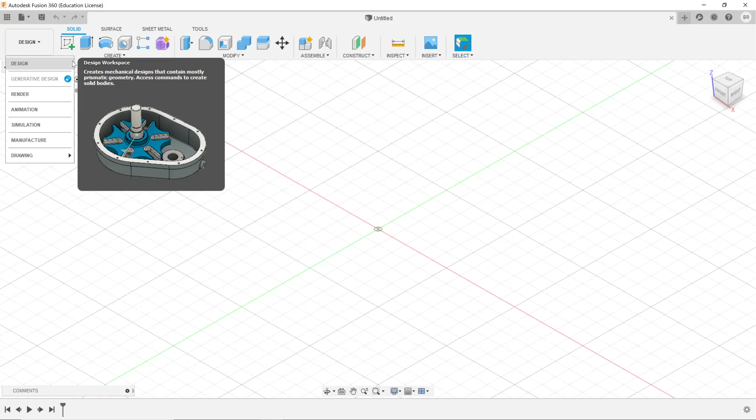Alright, so today's topic is CAD, which stands for Computer-Aided Design, and it's pretty vague because it can be a whole bunch of different things. Fusion can do a lot of different jobs for us as well. So the bit that we'll be working with most is the design workspace. So first of all, I guess we'll open up Fusion so we'll go from the beginning.

If I can close Fusion. Yeah, there we are. Hello, hey, that's a sneak peek of what we'll be doing later. And my desktop is a disaster. And Fusion is there. Wonderful.

Right, so if you open Fusion on your computer, whether you've got that installed on Mac or Windows. Don't worry if you don't have it installed, you can still watch. If you do have it, you can follow along. But it launches just like this eventually, takes a little while.

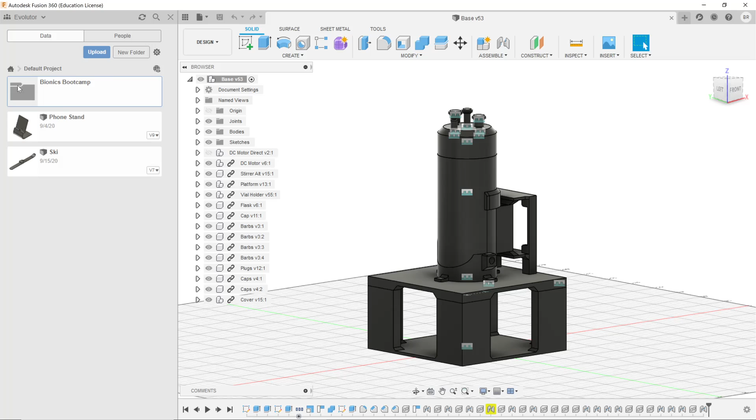This over here acts as your general place for storing your projects, for exploring them in Fusion. They call it the data panel, and you can hide it with that button or show it again. I'll probably keep it hidden for most of this since we don't need to fuss with it too much. Go back to Home, Default Project, Bionics Bootcamp. There we are, and we'll close that. Excellent, we'll have a new blank slate.

I think the plan for today is I'll try to introduce you to the general idea of designing things in 3 dimensions and how you can do that with Fusion 360 in particular. Then there's a set of exercises, challenge problems to work through designing.

But we'll start just by exploring a couple of the tools and the general idea behind parametric CAD, as it's called.

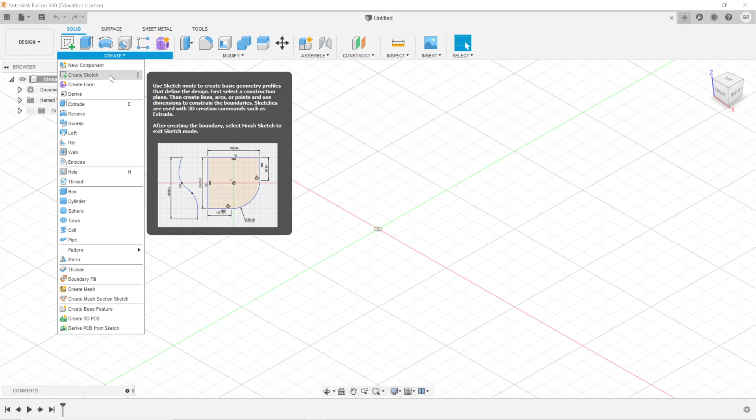Fusion has these menus up here when you're in the design workspace. They give you a bunch of really helpful tooltips, so if you scroll over them, they'll tell you a little bit about each of these tools, and sometimes show a picture of what you can do with them, which is fantastic.

With that being said, I think to be most effective when designing things in Fusion, it's nice to know the keyboard shortcuts for things. So when there's an easy shortcut available, you can see some things that have shortcuts, like extrude is E, hole is H, and things like that.

When there are easy shortcuts, or other tricks like right-clicking with your mouse to get a context menu, I'll try to show those off, at least the ones I know, because they're a faster way to work. I'll try to be sure to show you both the visual and keyboard shortcut solutions to all the things we come across.

So, without further ado, let's make our first shape in Fusion. There's a number of ways to do this.

You could either go into your Create panel and pick some pre-existing solid, which is what this section here is. If we wanted a box, all we have to do is click on a box, and then click on a plane. So this is our origin, we have 3 axes and 3 faces to put it on. We can just click there and build ourselves a box, like that. That's one way we could go about doing things.

But most of our time working with Fusion will be working with things called sketches, and that's where we'll see the parametric nature of the CAD come about. The parametric part means that you can specify different parameters. Actually, if you look at this little picture they've given us here, if it pops back up...

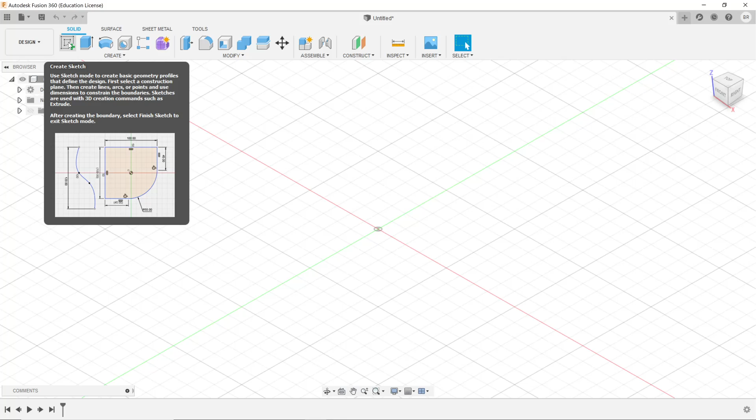Yeah, sure, okay, so I can't point to it at the same time. But you can see in this sketch here below, where you have some lines, that they have different dimensions on it, and there are some symbols scattered about that mean different things. We'll take a look at what those mean—those are constraints. If you know certain things about how you want your shape to look or your part to be, you can specify those, and it will ensure those conditions are always met, giving you lots of flexibility.

I'll show you what that means practically. When you're first starting and want to create a totally new sketch from nothing, you can go up here to the Create Sketch button, or as an alternative, show your origin by clicking this little eye sign here. If you show your origin, you can then click on a face to design.

We'll design on this one because we'll keep our Z axis as up. We can click on that, and if we right click, you can see some options down here. One of them is Create Sketch, so we can do Create Sketch.

Now you can see that's changed our interface quite a bit here. On the side, we now have something called the Sketch Palette, which gives us a number of little options. Our view cube here has stuck us in the top view, so we're looking directly at the plane that we're sketching on.

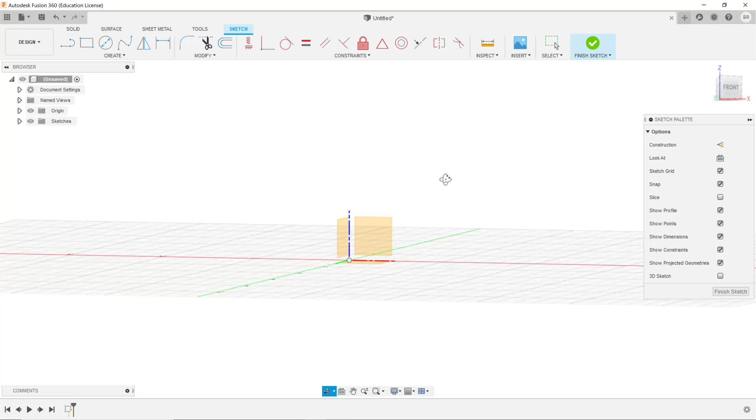Note that, and it might be different depending on your control setup, but if you have a mouse with a scroll wheel, hold down Shift and then click your mouse button to orbit, like looking around in 3D space. The alternative, if you don't have a middle scroll wheel, is to go down here and click on this orbit option, then you can just left click anywhere on the screen to do the exact same thing. That's nice and convenient to have at your disposal.

You see as we do that, our view cube up here in the top right corner moves around. If you ever want to get back to an exact position, like looking exactly down on this, it's a bit difficult to get exactly right, so you can just click on the top view and it snaps you back.

These arrows here let you rotate things around this way, in 90-degree increments, and these little arrows on the side let you turn the view, I think, to the right side, then the bottom, then the left, then the top again. Those just get you to the other side of the cube that's hidden just past this way.

And if you click on a corner, of course, you can see at an angle. That's a bit difficult to see, I'll admit, when there's nothing drawn. We'll come back to that once we have something actually in 3D space.

Additionally, one last moving-around control before we actually draw something: with your middle mouse button, if you've got one, just click and drag without pressing shift, and you get pan, which moves the screen around like this. You can even see it highlights the graphical equivalent, which is this pan option here. You can click on that, and that lets you move things left and right and up and down.

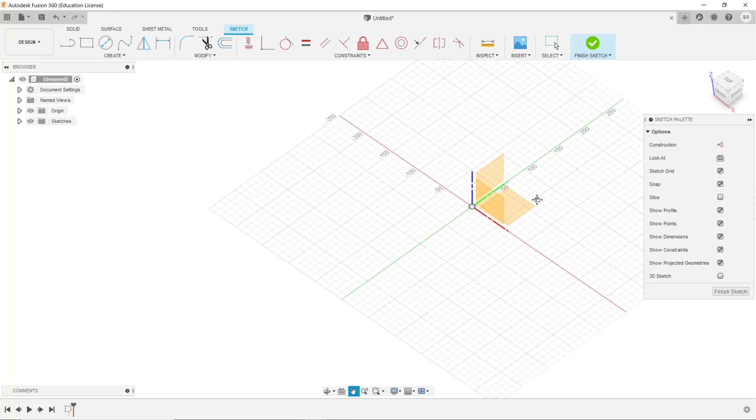Yeah, and those are the main controls. Scrolling like you would on a web page, just in and out, whether with a touchpad or an actual mouse, zooms you in and out of the model. You can see as we zoom in, it gives us more and more grid points, but if we zoom out, there's a point at which it kind of cuts off our little grid.

Cool, so that is how you navigate in general. For the people who have Fusion open, I imagine you've given that a bit of a go. I'll create a quick poll.

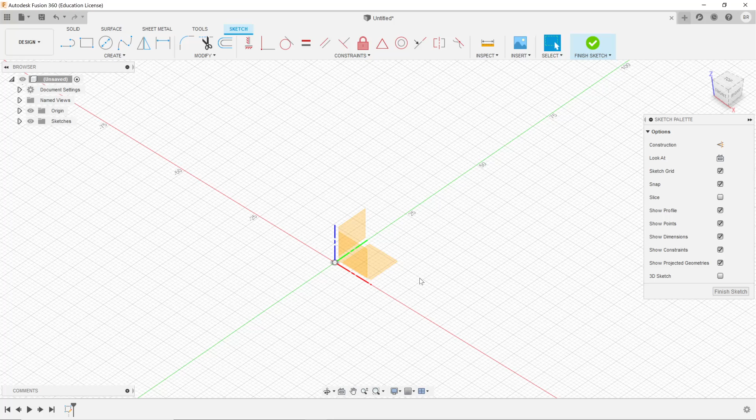Any questions about looking around in Fusion? These are just things that'll become second nature eventually. Oh yeah, I realized I phrased that as a bit of a confusing thing—I said 'any questions about' as opposed to... okay, fair enough. Well, if you do have questions, feel free to write them in either the Discord, where the polls are, or in the meeting chat. Okay, we have one person who might have a question, unless they've reacted positively because they don't have a question, which is my fault for making it confusing. That vote has since disappeared. Okay, yeah, my fault for making that a confusing question. I'll try to keep them positive answers in the future, instead of negative like that.

Okay, awesome. Well, if there are no questions—and if there are, feel free to write them and I'll get to them—we'll go back to our top view by clicking the top of our cube, so no matter where you are, you can just click on top and it gets you back to your top view. That's where we're sketching, and we'll draw something. So, say we want to draw that same box as before. There are a number of ways we can go about this.

There are actually several types of rectangles you can draw. In your Create menu, you now have some different shapes. One of them is a 2-point rectangle. We can click on that, draw out a rectangle, and there's a rectangle that we have sketched. I'll re-hide our origin so it's not in our way anymore.

So there's one rectangle. Another way to create the exact same thing is you can undo with Control Z, like you normally would. I'll turn back off the origin. Another way to do the exact same thing is you can press the R key on your keyboard, and that changes you into this different mode that automatically sets you up to draw one of those 2-point rectangles. I can press Escape to leave this mode, and then from there I just press R and I'm back in rectangle mode. I can draw more rectangles.

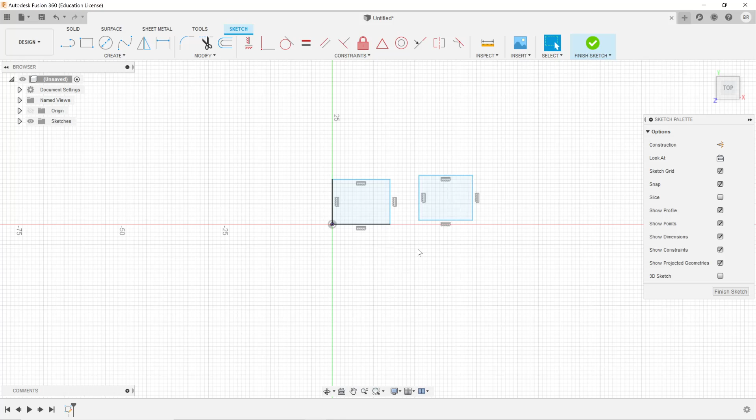I'll undo that. And finally, the most useful thing, I think, for your Fusion work is going to be pressing the S key. If you press the S key, it pops up this little search menu, wherever your mouse is at. You see it has a couple of things that are pre-locked up here, like a 2-point rectangle. There's another type of rectangle called a center rectangle. But you can type on your keyboard anything you would like, and it will search all of these menus for you and return relevant results.

So if I did S and then typed rect, you can see we have rectangular patterns we can do. There's a center rectangle, a 3-point rectangle, or a 2-point rectangle. We can choose any of these. You also see when I scroll over them, there's this little arrow, and that would put it up in this toolbar. If I want to move it out of the toolbar, I just press the X again. So you can put some shortcuts there.

It's incredibly useful, this little S menu. You'll see me using that a bunch throughout this tutorial. So whenever this little menu pops up, I'm pressing just the S key on the keyboard. And that works in both this sketch mode and also in the more non-sketch mode of this Fusion design workbench. So very, very helpful shortcut, the S shortcut.

Stellar. So I'll go on and press the S key, and I'll grab a center rectangle. I'll show you how that's different. Here, instead of clicking on a corner of the rectangle, you're clicking where you want the center of the rectangle to be, and then you can click and drag it out. You see here that this rectangle has its center where I initially clicked, and then I just have to place the other point of it.

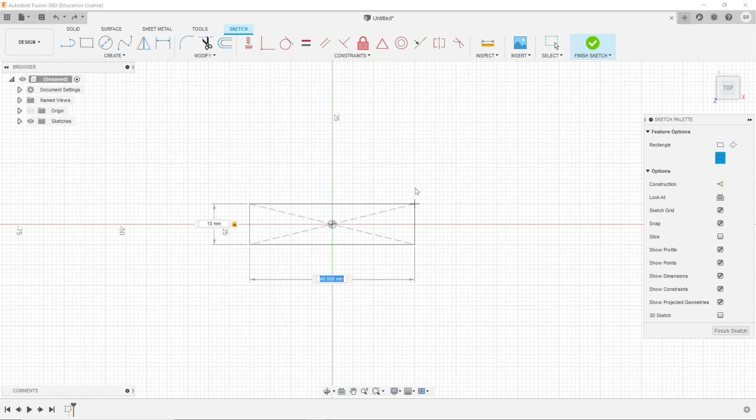So if I wanted to make a 10 millimeter by 10 millimeter cube, so that's just a 1 centimeter cube, I could type 10, and you see that changes it there, and it also changes the size of the rectangle. If I press the Tab key, above caps lock probably, that moves you to the other dimension. Then you can just type the same, so type 10 again, or 20. You can type 10 again. And then from there, just hit Enter, or you can click with your mouse to finish the shape.

So what we see here is a fully constrained sketch. By fully constrained, you can tell that because this shape is black. You'll notice that's different from if we just created a rectangle with no dimensions. This one is blue. What the blue means is, if you just take your cursor, press Escape and you just have your cursor, you can grab sides, you can move them, you can change it. It's not really very defined, it's not constrained to only be one way. It can change.

But it's good in your designs to lock things in so that they cannot be changed without changing these dimensions. That ensures that no matter what future things you do down the line, it'll always be guaranteed that this side is 10 millimeters long, and that this side is 10 millimeters long. And these constraints here are equal constraints. So that means that this side will always be equal to this side.

You can see when I hover over one of them, it lights the other one up. And this side will always be equal to this side. And that's just something that defines this rectangle. That one there means perpendicular. We'll see a bit of that later. It looks like that little T shape. And that one means it's horizontal or vertical. So in this case, it's horizontal.

And if I try and grab this, it's a black shape, so that means it's fully constrained. No matter where I grab and click on this rectangle, I can't move it around because the center is locked to the origin, and the sides are locked to be 10 long, and it's locked to be a rectangle. So you can see that gives me absolutely no room to mess about. So let's go ahead and delete this shape. I can highlight it and press the Delete key on my keyboard to get rid of it.

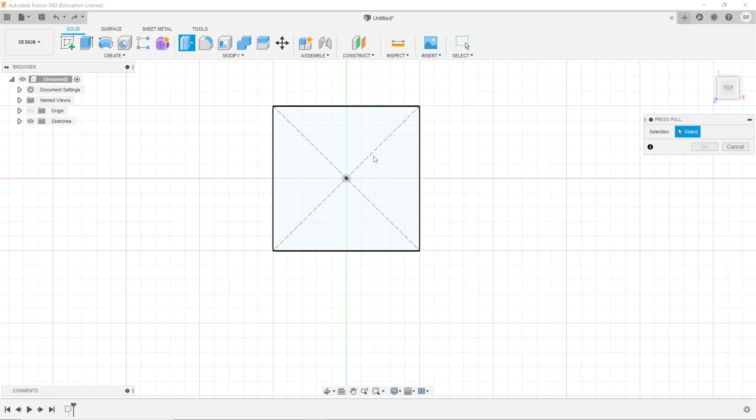So if we go back to our sketch, whoopsie daisy, yeah, back into our sketch, then from here I can just press the Q key on my keyboard, and you see this press pull thing's popped up. I can click on the bit that I want to press pull, which is this bit here, and then if you look at the side, you can see it's giving me the option to pull this up into 3 dimensions. And now we have a square there.

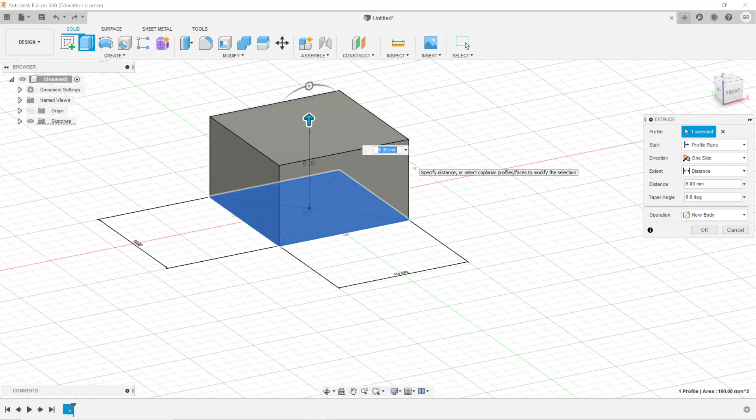You also see that it gives me another highlighted number. This is, again, the dimension we would like to pull it out this way. So since we're making a cube, I can just type in 10 and then press Enter, and then there we are. So now you can see here we have a complete cube. Look how fancy we got there.

If, by the way, any of you are looking at this cube and thinking it looks a little bit strange to you, that might be because, by default, Fusion uses something called orthographic projection. That's basically a bunch of fancy mumbo-jumbo for if you have some shape, like this cube, and you copy it, and I'll paste it. I'm not sure if I'm actually allowed to do that. I've not actually done that before. So, okay. I will take this body here, copy it, paste it, and move that this way.

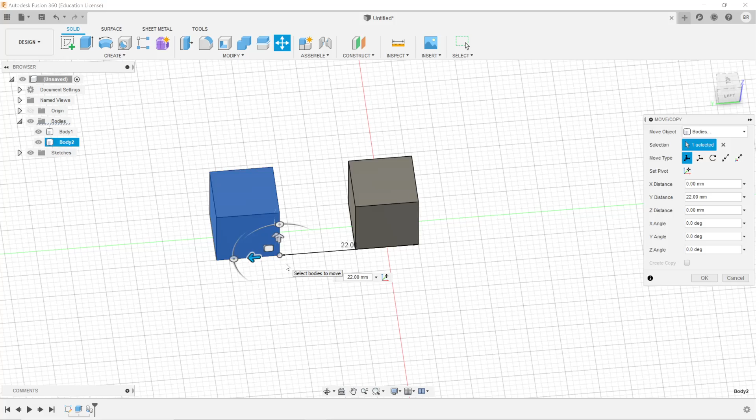So now we have... Oh no, what have I done? Oh, I canceled the move. That's my fault. So I need to click enter instead of escape here. That's fine. Cool. So if we have two squares, what orthographic projection does is it ensures no matter how far away they are, they always look the same size.

So in our actual human vision, when we look at things, the farther in the distance they are, the smaller they are. And that's just a matter of perspective, so there's plenty of reasons for that. So you see here, in orthographic projection, they always look the same size no matter what distance they are. This is nice for making mechanical parts, because you can just overlap things, and you see wherever they overlap that, okay, they must be the same size.

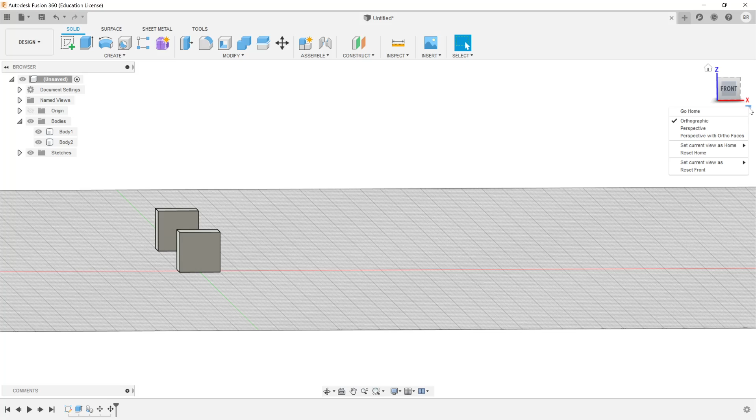So that's helpful. Fusion also, however, lets you look at things in perspective mode, which is how you might more naturally see it in the real world. So you can do that up here by going to perspective mode. Perspective mode. And now you see this looks more like what you would expect in the real world, where the things in the distance are smaller, and the things up close are bigger.

You can also see that the grid lines are more realistic as well. So it's useful occasionally to go into perspective mode just to see what things might look like a bit more in the real world. But the orthographic mode is very helpful for actually designing things.

You also have that option in addition to up here. You can get to it down here, display settings, and visual style? Not quite visual style, camera. Back to perspective, or orthographic. So see here, now they're the same size again, which is very helpful. Although the visual illusion makes the distant one look a bit bigger.

Interesting. But that is that, so I can get rid of that second one. Yep, that's fine, I don't mind. Stellar. And we'll go back to our front view. And zoom in a bit. And up here. So back to our cube.

I'll ask real quick how people are feeling about all of that. So I'll create another poll. Not a pool, we're not going swimming. How are people feeling about sketches and extruding? This time it's a positive poll again, so if you're feeling good, you press the up one.

Excellent. Sounds good. Does anyone have any questions about the orthographic projection stuff? I mean, that is far from particularly important, but it's just kind of good to know if things look weird, that's why. Awesome. Cool. Seven ups there. That's pretty good.

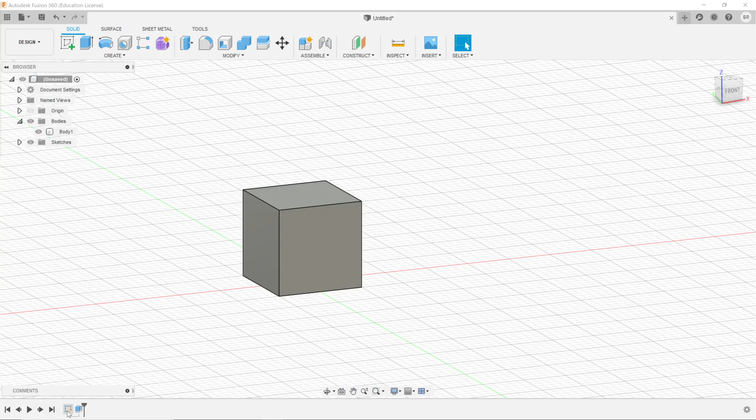But it's time, I think, to take a look at one of Fusion's coolest features, which is this timeline down here. So what this timeline lets you do is go backwards and forwards in history and take a look at all the different edits that you've made. So what you can do with this parametric modeling especially is go back in time and change something and see how that updates your model in the future.

So this extrude is one feature. This extrude is when we took our two-dimensional object and made it three-dimensional. So that just went 10 millimeters up, or a centimeter up. If we go back to before that, you can see we have nothing again. If we reveal it, here is a project tree, I guess, or document tree. So you can expand all these things and see what's inside of them.

So here's our origin. If we turn that on, you can see here are all the different parts of the origin, the different planes, the point in the middle and everything. And you can press all these eyes to toggle their visibility on and off. So I'll hide all of the origin there and collapse it again.

Under sketches, you have our first sketch that we drew. So if we're not seeing it, like we aren't now, we can click on it and now we can see our sketch again, but we can hide that as well. You can turn it on and off with that, which is very good to know.

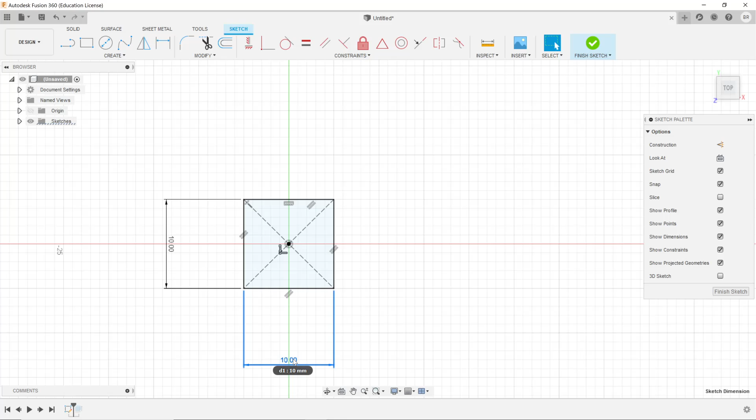But if we wanted to edit one of these features in the past, we can go and double click on it. If we double click on it, you can see here we're back to our sketch view. So we've seen this before. What if, say, we wanted not a cube anymore, but a rectangular prism? Then we could go down to this constraint here that says this should be 10 wide, and say, maybe let's make that 30 wide instead. And we can hit enter. Now it's 30 wide. We can finish our sketch by pressing this Finish Sketch button.

And then if we go forward in our timeline, we see, hey, our extruded part has actually changed. So you notice we did not have to do the extrude step a second time because the extrude was already done. Instead, we just went back in time, we changed this first sketch, and now when the extrude happens, it happens on that new, longer rectangular sketch. So this history timeline is something we might see a couple times as we are working on things.

Very, very useful. It is, I should note, possible to work in Fusion without this timeline. You can, I think, go up here on your main project and right-click, and then there's something at the very bottom that says do not capture design history.

Unless you have a really good reason to not capture design history, I would recommend keeping it turned on. It's very, very useful to have, and it's kind of a pain to not have. But say if you import a model from some other CAD software, by default, this will probably be off. So if you do turn it off, which I'll do real quick, it says it gets removed and further things won't be captured, so it gives you a warning.

So you usually should not do this, but if you do end up with a model that does not have design history, say if you just imported this from somewhere, you can also right-click on this and turn it back on. Now the last option turns into capture design history, and you can click on that and then you get the history back. But now you see it's just this big base feature here.

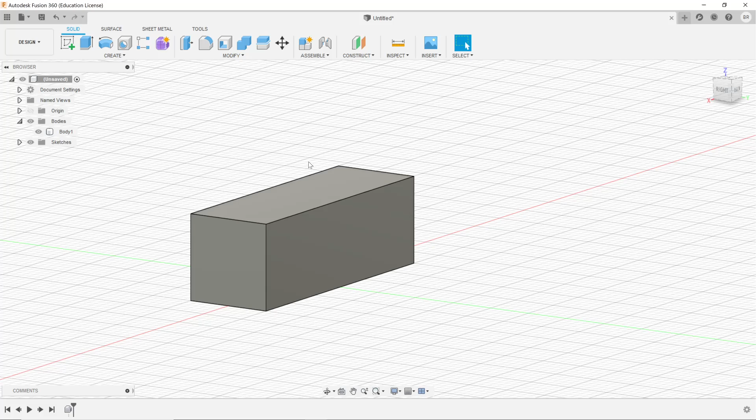Cool. Okay, so we've seen how to form rectangles and extrude them. We're making some cracking progress here. Let's take a look at some of the other tools. So I'll just get rid of that. We'll make another sketch. So remember, to make a sketch, there's a couple of different ways we can do it. We can either do new, create a sketch, or we can turn on the origin and do a right click. I'll just click new sketch.

We pick a plane to put it on. We'll put it on this ground plane again. So we'll put it there. Then we can take a look at some of our other sketching options. So if we look down here, we see a whole bunch of them. So there are rectangle options. There's circles, which one of them is under C.

So if you press the C shortcut, you get a center circle, and you just place where the center is, and you drag it out to whatever you want the diameter to be. So a 100 millimeter diameter circle looks like that. You can create that one there.

Another useful shape might be the arcs. So the arcs here, there's a couple different types of them. If we press the S key, remember that brings up our toolbox, and we type arc. We'll start with a 3-point arc. So this one, I believe you give both end points. So there's one end of the arc, there's another, and then you can kind of drag out the arc this way. And that can be whatever size you want it to be.

You notice that that's blue, which means that's unconstrained, so you can actually move this around and change the size because we haven't specified the size. To specify the size of something that doesn't have a constraint by default, you can use either this tool up here, which is sketch dimension, so you can click on that, or press the D key on your keyboard, and that brings up this dimensioning tool. Then here you can see it lets me set the radius of this arc, so the radius will be 30, say.

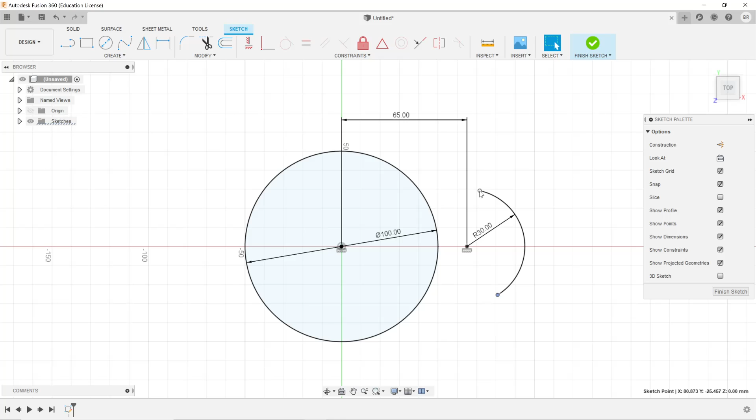So to do that, say maybe we want to make a really ugly lopsided 2-segment snowman, and put that point like on that line kind of thing. What we can do for that is use the coincident constraint. So that means that some point is on top of a line, or that 2 points are on top of each other, or something similar to that. So we can do coincident, and click on that one. It's actually already selected because it's blue.

Then we just click on the thing that we want it to be touching, which will do the circumference of this circle. So we'll click on that, and you can see, zoop, it's gone, it's connected it to that, and importantly, that free circular point here has disappeared because it is no longer unconstrained. So if we take our thing and we try and drag it around, we can't move that anywhere. We can move our mouse as far as we'd like. That arc is not budging.

Finally, we'll do the exact same thing here. So we'll pop back up our coincident constraint again. There, and then click on this line. And finally, we have a pretty fully put together thing here.

One final thing we could do, if we felt like it, you can trim sketches. That's what this modify thingy here is. So you can either trim with these scissors, or you can press the T key to get you in trim mode. This lets you delete certain segments. So say we didn't want this segment separating these 2 parts, we just want it to be one shape, we could get rid of that one there. And now you see it's one fully constrained snowman-esque shape.

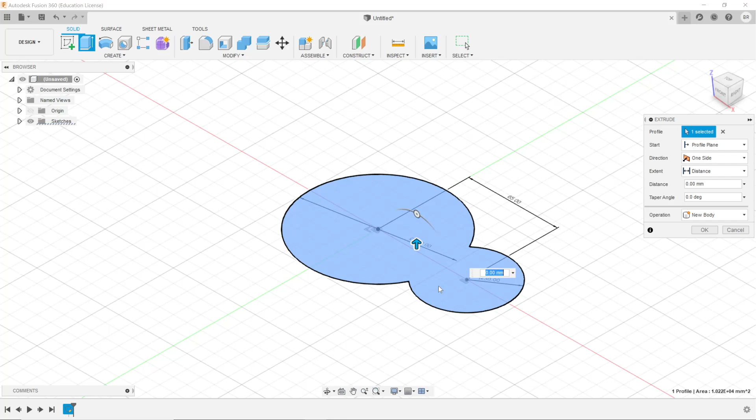Then from here, we can press escape to get out of the trim mode, and then press Q to get into the press-pull mode. That automatically puts us in the side. We have press pull, select this face here, and then we can pull it up or down, or give it some size. And now we can have our snowman in 3 dimensions there. Take a look at him. He's beautiful-ish, kinda. So sort of snowman-esque design.

I think in our second session, or maybe at the end of this one, we'll take a look at a slightly more advanced tool. We'll take a look at it now. Why not? So if I go back here to my sketch, we can be done with our sketch. We can finish it off. You see it's still being showed by default because we haven't extruded it or turned it into anything 3-dimensional yet. There's also a tool called Revolve. So what Revolve does, it shows it a little bit here. There's that blue selection that you can see in that example picture.

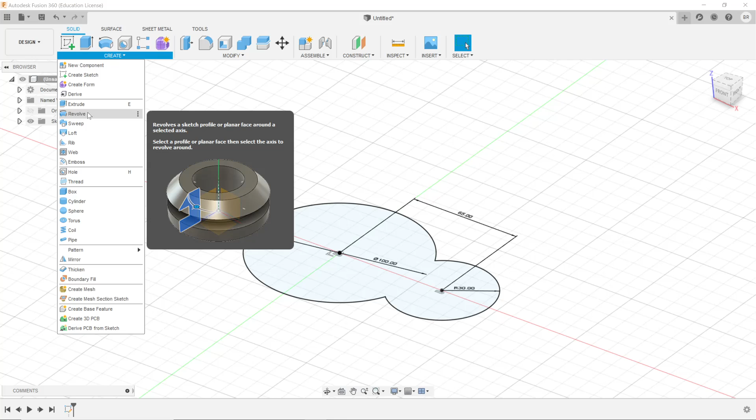So that is your 2-dimensional sketch. And what Revolve does is take a 2-dimensional sketch and rotate it around some axis. So that if we took our snowman thing here and rotated it around an axis right through the middle of it, we could get it to form like an actual round snowman.

So we'll try that. We'll click on, well, the profile was already selected, you see. So now the next thing we need to select is the axis to rotate it around. Our origin has very helpfully appeared. So we can select this red line here, which is part of our origin. That's the x-axis, and that's going currently right through the middle of our snowman. If we click on that, and then 360 degrees is fine, I think.

Try moving the profile. Am I being silly? I might be being silly about how it's actually rotating things. So maybe I need to pick a different axis here. So if I unselect that one, and we select a different one instead, say the green axis, which is hiding way back here. Is that one better? Okay, so maybe it doesn't quite like it when it's in the middle there, so I'll have to take a look at how we can revolve that a bit better.

But we'll jump to that probably in our second session, or maybe at the end of this one again. I guess it doesn't want to rotate around its center axis, so maybe it needs to be an axis outside of the actual thing. But that's alright. There are other ways to form that shape.

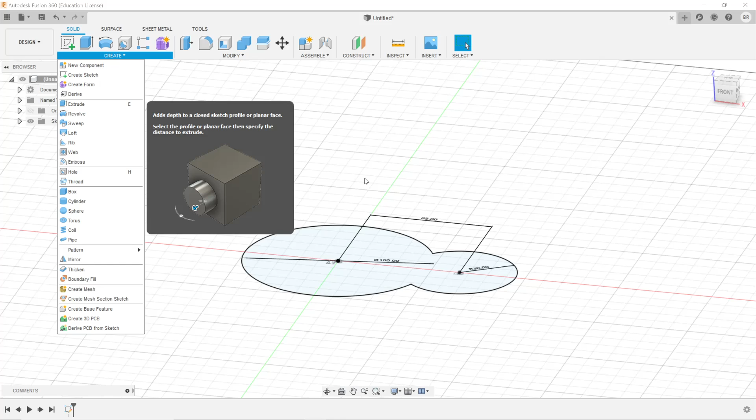Cool. I think the next thing we can probably do, there are certainly plenty more tools, but I think most of them will come across kind of organically as we're doing things. I think we'll probably start on that first little exercise thingy in a second. Before I do, I'll ask how people are doing and if there are any questions. So if there are any questions, feel free to type them. Otherwise, I'll ask, how are people following along and feeling about constraints?

Cool. Any questions that people have so far about either what we've done or why would we do what we've done? I can see Philip is typing, so I'll let him type out his question. How do you create one blob out of the two blobs again?

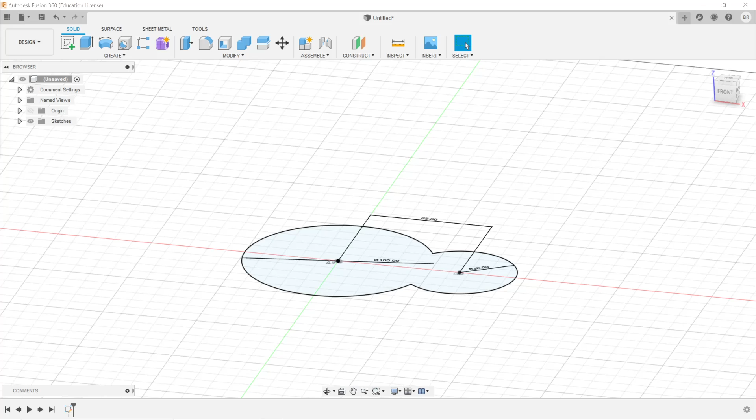Good question. All right, so we can go back to our sketch real quick. I wonder if it'll let me undo straight through that. Yes, it will. Right. So here are our two blobs. The way to get rid of this middle segment is to take this trim tool, which you can grab by clicking these little scissors, highlighting this. It shows a red segment for that bit in the middle. Then you click on it, and it'll go get trimmed away.

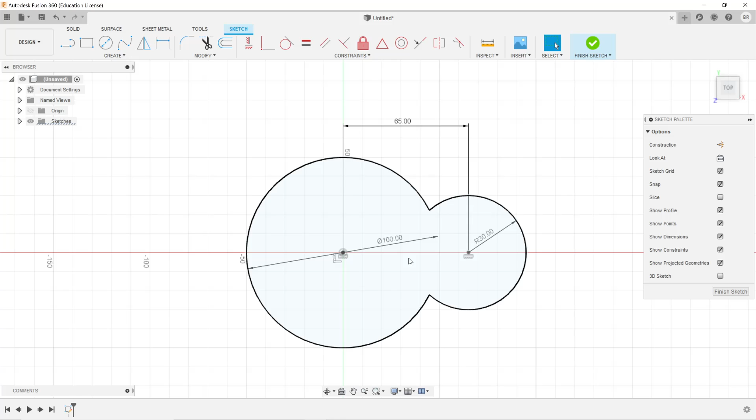The alternative is to press the T key on the keyboard. T key brings up the exact same trim tool you can see, and you just give it a nice little snip. Awesome, cool. And then Maria, you were typing there for a second. Did you have a similar question, or was it related to that one? Have I answered it? Okay, no worries. If you do want to ask a question again at some point, or if it was another one, feel free.

Cool. Alright, with that in mind, we might then look at forming this first shape we have. So I'll press just Control-N, brings you a new document, so you see it creates a new one up here. And you have like tabs, like you would in a web browser, that you can switch between them.

I'll just toss away our snowman. Sorry, snowman, but I don't care about you. Goodbye. Ha ha ha. Alright, and we're back to an empty document.

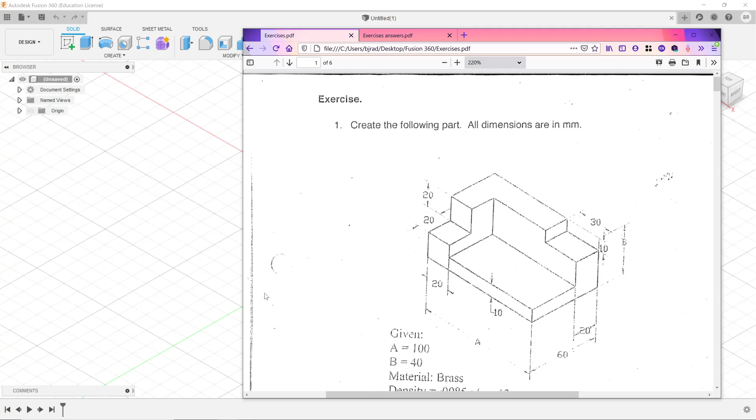Excellent. So, from here, I think what we're going to try and do... again, not Linux. Oh, so much more difficult in Windows. That's the one. We're going to try and make this part here. So, these are a set of exercises. I actually have no idea where these originally come from. These might come from some mechanical engineering module. I think I got these from an engineering student who got them from GrabCAD, who got them from, I assume, from the photocopy nature of them, some sort of university module.

But regardless, it gives us some dimensions. Most of the time, these are everything that we'll need to make the shape. There's a couple of these examples that seem to be missing a dimension here or there.

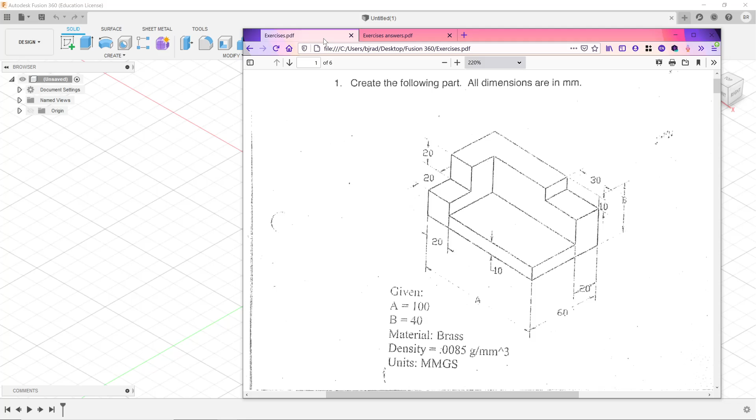First though, let's try and create that. Can we fit these both on the same screen? Time to get brave.

Alright, I think that if we... Whoa, hello Fusion, you do not want to be resized, do you? In fact, you will not be resized. Alright, fair enough. You can see my computer's a bit squirrely about the multiple monitors as well. Okay, I'll zoom out a touch there, and slide over. Is this acceptable to look at? Can people see this part at an alright zoom level, and also still see Fusion decently? Is that all good?

Alright, sounds good. Well then, let's get to making this shape. We'll start with the easy question.

Alright, here's Fusion. I would like to start making something. What is the first thing I should do? Any ideas? And again, instructions don't need to be exact, just keywords work as well.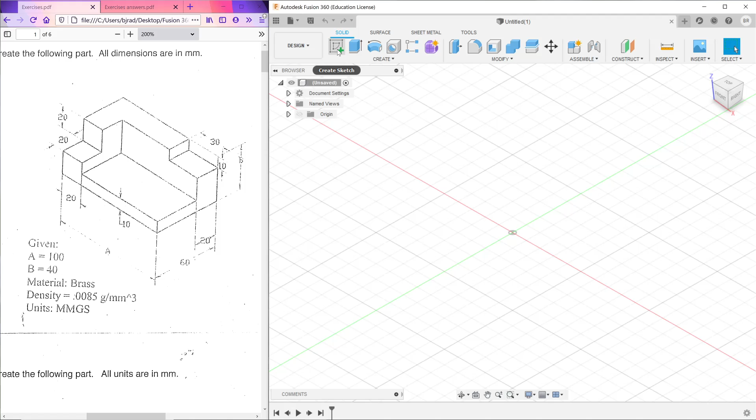I would agree with you, Philip. Yes, I think we should create a sketch. There are, of course, several ways to do that. For now, we'll just press this Create Sketch button, because that's the fastest way to go about it from nothing. Then we pick a face to put it on - I'll put it again on the ground face, there. This is treating Z as if it's the upwards direction, but there are different conventions for that.

Alright, so here we are. I would quite like to create a rectangle, because that's the base of this shape, and I'd like it to be centered around this origin. So the perfect shape for that would be a center rectangle.

I'll press my S key, and S pops up this shortcut searching menu, and I can type center - you see there's a couple different types of center. That's probably not the most helpful, so maybe if I type rectangle, here are different rectangles, I can use my arrow keys, and then click on center rectangle. You can also see I've pinned it up here in my shortcuts, so I could just press S and press this. Those are just different ways to get to that. If you want to get to it the other way, you go here: create, rectangle, center rectangle. All of those are entirely equivalent options.

So I'll go ahead and do this one, that's the fastest one for me. We'll put our center right on the origin, which is this place here - you can see it kind of snaps to the origin. Once you get close to it, it draws a little blue box around it. So I'll put it there, then we can drag out our rectangle.

From our sketch, or our design blueprint here, you can see - somewhat annoyingly perhaps - they've decided to just replace this with a letter, which you then have to look up here. So that's just 100 millimeters in that direction, and in this direction you have 60 millimeters. So we can go here, grab our center rectangle, place it, and we want this dimension here to be 60, then I press Tab, and type in the other dimension, which is 100, and press Enter to finish the shape.

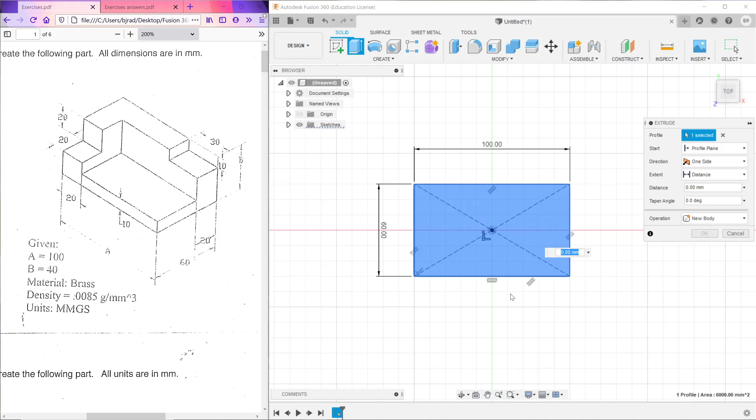Now it looks very two-dimensional still, but that's just because we're trapped in this upwards view. If we just take a look around at the side, we can see this is in fact three-dimensional and is exactly what we're looking for.

Cool. So say we're looking at it in this way. That's the same way, kind of ish perspective that we're going for. We can click on this corner here - maybe that's the perspective that we're looking at it from.

So far, so good. We have a lot still to add, but we can get to that.

Let's see, there's actually a couple of different ways we could do this. So we'll make this part in a couple of different ways so I can show off a bunch of different tools. First one I'll do - once you have a three-dimensional object, you'll notice when I'm floating over these faces, they get highlighted, right? So we could still do create sketch and then click on a face, and then we can write a sketch on this three-dimensional face.

However, there's a nicer way to do that sometimes. You can also just right-click on a face and then create a sketch right here. That's probably the easiest. You also have a repeat option, which repeats whatever you did last. So if you last created a sketch, you can just repeat it there. But I'll just create a sketch on this thing.

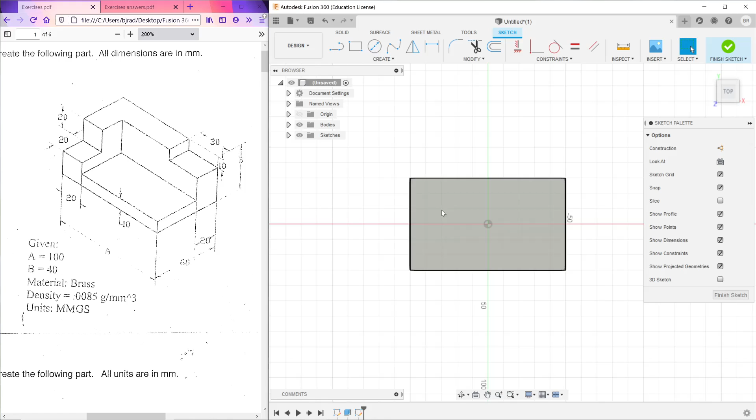And then what I will do is make a big divot here that will correspond to this sunken down region. This first way I'm doing this is kind of by bad luck on my part, not the best way to solve this problem, so I'll show you a better one in a minute. But here we can still solve it because we know how thick that is.

First thing we'll do is we'll create a rectangle here from the bottom. We'll make it just some arbitrary size. You can tell that's blue, it's unconstrained, so that means it can change size. That's actually fine. We know that this wall up here on the left should be 20 millimeters, so it should be 20 millimeters between these two lines.

So we can press our D tool to get our distance back. Actually press escape, unselect that. Press our D tool, click on this line, click on that line, go down, and we can say 20 millimeters please, lock that one in. Now that one's black, you see, so we can still slide this up and down, but this cannot be slid left and right anymore.

We do the same thing with this line, except this one - well actually also 20. So we'll press D, click, and click. There, 20. So there we are. There's our general wall shape.

So now from here, we can press our Q, our press and pull. We'll select this face. We want to shrink that down so that it's 10 millimeters away from the bottom face.

So you could do this by doing a bit of simple maths in your head. We know it's 40 tall in general, and we want 10 left at the bottom, so we could do -30. That pushes it in -30. I'm actually not entirely certain if we can do it this way, but I'll give it a go.

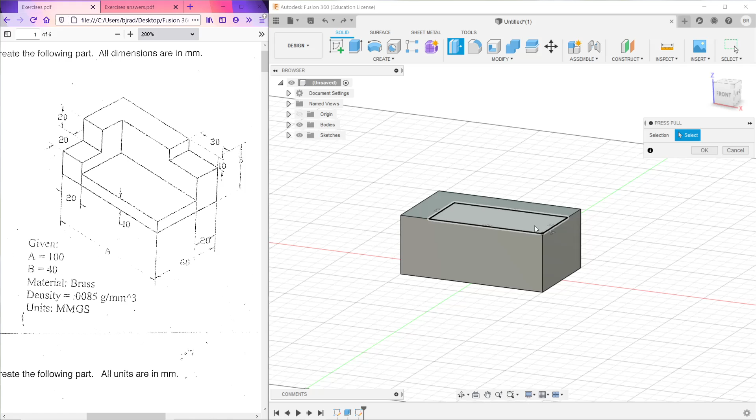I will undo a couple of times. Then we'll go ahead and do a push-pull here, and I'll do the to object again, so you can see it. Here you're in distance mode by default, but you can go to extent under the extrude bit, and then from here you can go to object.

I want to go all the way to the bottom, and then the offset—all the way to the bottom, minus 10. There we are, and then we can go ahead and hit enter. Excellent, alright, so we're here. If we click on that, it's probably a pretty similar looking view.

Now, for anyone feeling keen, what is our next step, do you think? There are a couple of different ways we could go about making these last two cutouts here. What do people think? What should I do, and where should I do it? Any ideas to make this shape?

Yes. How do we change the direction of the dimension? How do you mean, Maria? Do you mean... yeah, like when I wanted to put the dimension as 20 millimeters horizontally, the command was vertical.

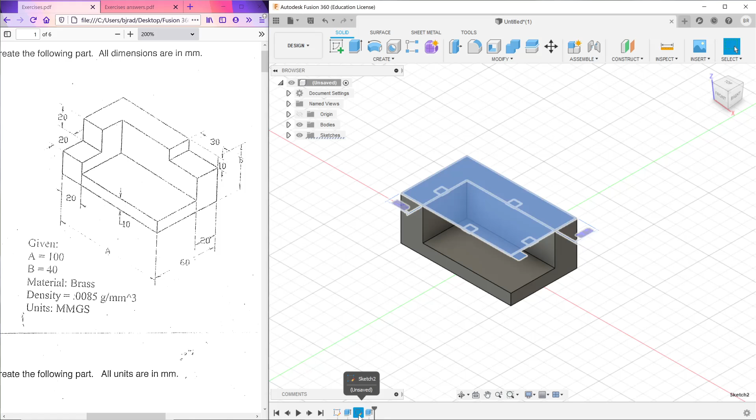Ah yeah, so you mean back here in the sketch bit, right? Yeah, so when you click on a line, it will by default just assume you're trying to give the size of the line. So if you press D and click on that line, you'll see this, which I assume is what you saw. If you then click on a second line, it will switch automatically and give you the distance between them—so I clicked on that second line there.

Okay, thanks. No worries, happy to help. Cool, yes, that's a very good question, something you'll probably run into decently often. Sometimes it'll try and assume for you and be smart, and sometimes it assumes wrong. If it assumes wrong, you just need to give it a bit more information.

Cool, any ideas on what we should do at this point to make these cutouts? Remember, we can create sketches on faces if we want, so I don't know which faces we should do that on. Any ideas? There are several correct answers here.

Any ideas? The crowd goes wild. Okay.

So what we can do from here is the same thing that we did when we made this cut. Yeah, so top face, we'll do that one. It's actually probably a better one because we can do it all in... I'm not sure if it's better, it's equivalent. So if we roll over this top face here, we can right-click on it and go to Create Sketch. I think the right-click is nice and fast because you can just right-click and then go Create Sketch. If you don't want to do that, you can also do Create Sketch up here and then select this top face. Both of those are equivalent.

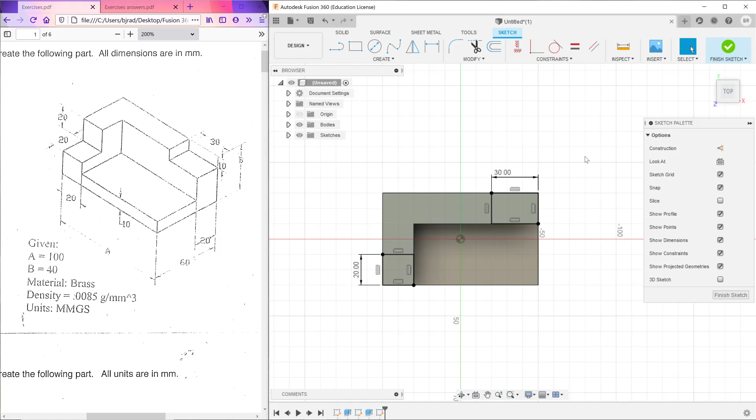From here, we can do our press-pull, so I'll press Q to get to that immediately. Then I can click on this top face here. How far down does that one go? Well, our sketch says that one goes down 10. This time it's best to use the distance, because that's what our sketch gives us. It says go down 10. Then we can also do the same thing over here.

So you'll notice our sketch has disappeared. That's because we've used it once, and Fusion assumes you're done with that, which is a bad assumption on its part, but it's usually correct, I guess. It's not super clever about it. So to get that back, go into Sketches, this folder in your project tree, click to unfold it. If you were doing this well, you would name these sketches. You can click on them twice, kind of slowly, to rename them. So this could be the base sketch or whatever. But it's also ordered, so the last sketch we made is the one we're interested in.

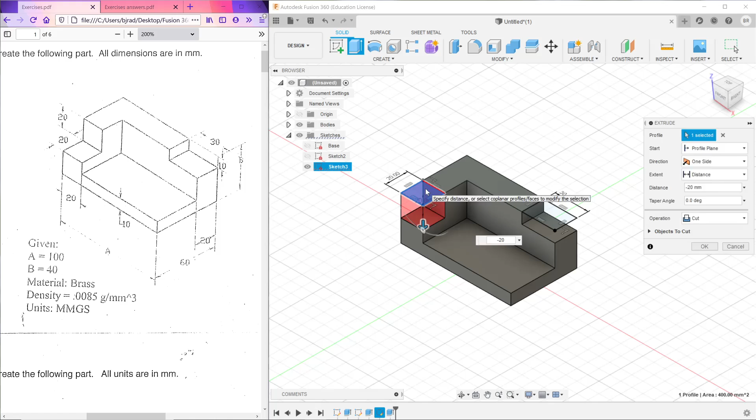So we click on sketch 3, make it visible again. Then we can see our shapes again. From here, we can do our press pull with Q. Grab this one, go -20, type enter, and Fusion will think for a second, and there we are. We can re-hide those sketches, and our shape is all done.

So what if we want to check our answer in this particular case? Well, we can set the physical material of this object. There are, as always, several ways to do it. You can go up into Modify, and then down to Physical Material. Or the much faster way, I think, press S, start typing physical, and there you are, physical material, enter. Then you have a bunch of things that this can be made out of.

You can make it out of ceramic, so we could have a porcelain part or something ridiculous like that. For this particular set of exercises, they're using aluminum 6061. So we'll go down to metal, because aluminum is a metal, or aluminium. Oh, sorry. Oh, that's the yucky American in me. Aluminium. We'll go down to select aluminium, and you can see there's a bunch of different options.

And somewhere on that list, and it's obviously sorted by name and then number, we'll have 6061. And you just click on it and you drag it on top of the shape that you want to apply it to, and then let go of your mouse button. And then you see the color changes slightly, and it's been turned into an aluminium shape.

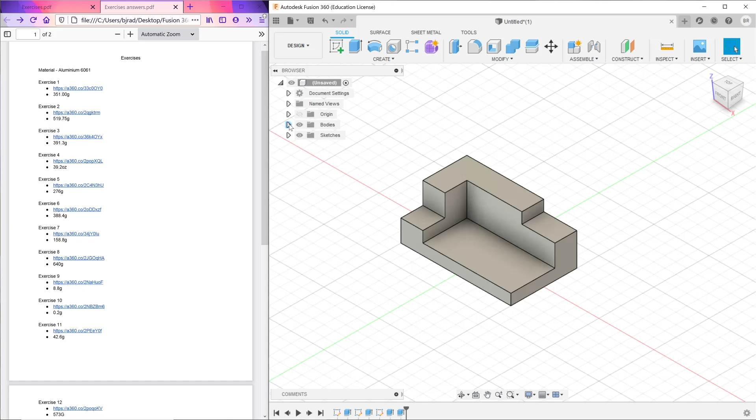Now what we can do to get some information about this is we can right click on it. I think if we do properties from here, yes, that's just the properties of the face. It tells us that it's made out of aluminium. But what we can do to get the whole body is we go under bodies, and then right click on the body itself, and then from there we go to properties.

And this tells us the area, the density, the mass, the volume, the material, which is aluminium 6061, what the appearance looks like, center of mass, other information like that. We're interested in the mass, which, sorry, probably a bit small to see, but it says here that it's 351 grams, which is in fact what we have over here.

351 grams is the expected result for this shape and this material. So that's our way of knowing, okay, sounds like more likely than not we've done this model correctly. So that's our little answer checking.

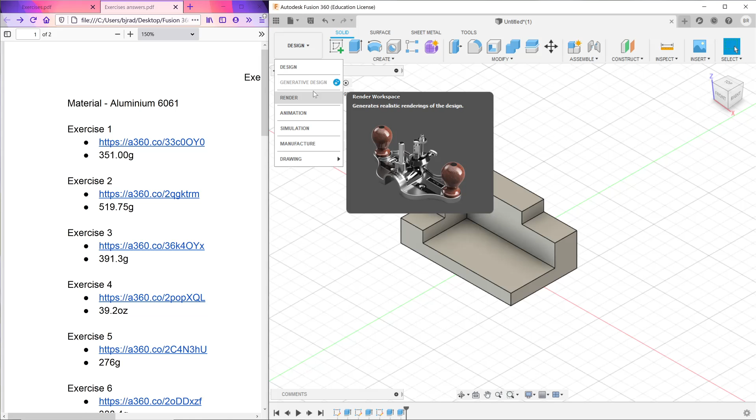There are still some things you can do locally, though. So if you go over to render, you can see this here, and you can do in-canvas render. And you can take a nice, pretty look at your aluminium, and you see it generates a much more photorealistic version. It takes some time to get there. This is doing it on my computer. Then you can export this image or something.

So this is how you can create really nice pictures of your designs to share with others. And they're much more realistic looking than just the ones in design. But this workbench we won't jump much into, because realistically it's just for making things look pretty, and isn't actually something functionally that you'll need very often. So we'll just jump back to design, which is where we are here.

Alright, excellent. That is our first part, so I will go ahead and ask, are there any questions about anything we did in that process? For the people who are trying to follow along, have you gotten to this exact same shape? If so, have you gotten the same mass of 351? So I'll ask how people are feeling about this. First shape.

And that is an excellent question, Maria. And it's very good that I looked that up exactly 5 minutes before this section. So the difference is really quite subtle, and you'll only see it in a couple of places. But for the most part, well, okay. Press pull is a bit more diverse. When you go to a press pull and you click on something, you see, well, okay, in this case it's actually on the offset face.

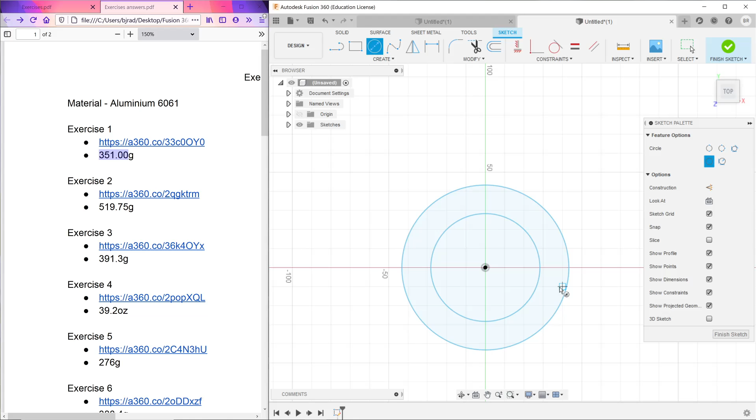I'll click here, so it's currently the press pull, but if I click on this, you see it changes into the extrude tool. So for things like this, it's exactly the same. They're identical. So it's just like doing an extrude there. A superpower, however, that press pull has is it can also work as something for offsetting faces.

So if I press Q again, we have press pull, select this inner face, now it's turned into offset face, and you can see this is something that extrude can't do. I can move after the fact, after the shape, this thing here, I can make it bigger or smaller, the inner face. I can do the same thing on the outside if I wanted to do so. So that is a different operation.

And there's one more different thing that it can do, I forget. You can definitely check the documentation for it. For our purposes, it's the same as extrude for the most part, but it is a bit more flexible and it's smart about what you click on. But yeah, for our purposes, you are correct. It's basically just extrude. Extrude is there. You can get to that with the E shortcut.

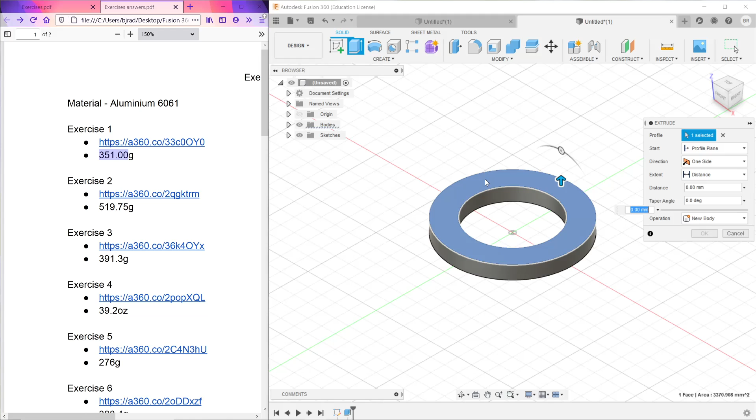That does kind of what you would expect it to do, which is the same as a press pull there. But you can see if I select the E tool, I cannot select this inner face. It has to be a flat one. So that's how those tools are kind of different.

Very, very good question. Are there any other questions? Seems like people are feeling all right about the first shape, which is good from the poll. Awesome. Okay, let's see if any other questions come in. If not, we'll look at this next shape. Cool. All right, this next one.

How to undo a fillet. Hey, good question. So we haven't quite gotten to fillets yet, but if you press F, or if you click this up here, so I'll press F. Oops, I'm not selected on Fusion. If I press F, then you can go here and apply a fillet, which is like a curve on a surface like that. It's really nice for some parts. Makes them look pretty. You can select several lines to do it on. Make something nice like that.

The way to undo it, general undo is, so I'll apply that. General undo is just Control Z in Fusion. However, if that's not working for you, or if that doesn't do quite what you want it to do, you can look down in your timeline here, and a fillet is its own timeline item. You can either move your timeline cursor, which is this thing here, back behind the fillet, so it goes back before time, so the fillet never happened, or if it's got other things in it, you can actually reorder items.

So if we put that there before that extrude, you see now, if we go back in time to before the fillet, we also lose this feature here. If that's the case, then you can just click on that individual feature and then press your delete key on your keyboard, get rid of it, now it's gone. Does that answer your question there? Awesome, cool. Neat. Anything more?

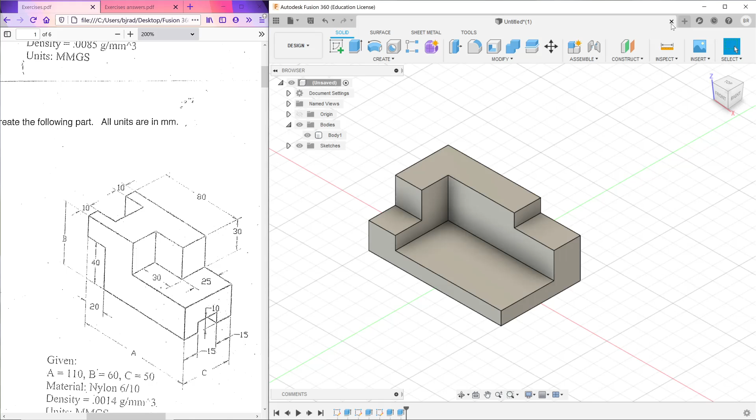I think this next shape is pretty similar to the first one in terms of no new tools, so I think I'll try and ask for more suggestions this time around. Awesome. All right. If there are no further questions, and if there are further questions, feel free to ask them. But otherwise, this is the next shape we're going to try and make. Here are all of our dimensions that we're going to work with.

These little holes, so look, there's a hole, it's kind of been pushed in. We're assuming for all of these parts that all these holes go all the way through the entirety of the object, so that they go all the way out the other side. If that's the case, how should we start this design? There's always a bunch of different ways to start it. We can start with a sketch on any face we'd like. So what do people think?

I'll go ahead and create a sketch, because I'll give you a spoiler, that's probably the best place to start for most things. Which side of this object do we want to sketch first? Up to all of you. Which axis should we go on? Bottom one, this one here, that one there. So I guess, that's the XZ, that's the YZ plane. Any place that seems natural to start for everyone? And remember, there's probably not a wrong answer here. It's just different correct ones.

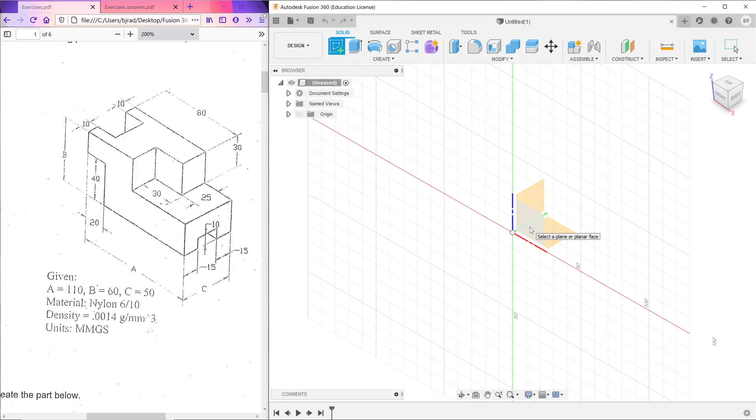Any opinions? What on the x this time? By x, do you mean this one here, the xz plane? I'll assume. Sure thing. Cool. Right on. Let's draw it there. Alright, so now we're looking at it from the side. At least in my head, we're looking at this face here.

So there's a number of different ways to design that. What should we design here? Oh, I forgot to show you one of the most basic tools. If you either go here and click that, or if you press the L key, you get a line. And you can draw line segments, and those connect together. So we could do something like that or whatever. So that's one option we have.

We could also do like a rectangle or something. Anyone have any particular ways you'd like to start? Line segments, rectangles? Anything you're feeling?

This is always much easier when we're in like the same room and people can shout at me.

Cool. Alright, I might make an executive decision then. Alright, I think for my executive decision, I will do this one with line segments. We can see how that one looks. I'll say arbitrarily that this red line here will be the base of the part. And I'll just sketch the general shape. And even here, there's a bunch of different ways that you can sketch this shape.

I'll go ahead and press my L key. I'll go here, I'll go back a bit, and I'll click there, I'll go up, and I'll go over and up again. And then we'll go over a little bit, I'll go down, over, and down again, and click there. And you can see when we close the shape, it turns all solid blue.

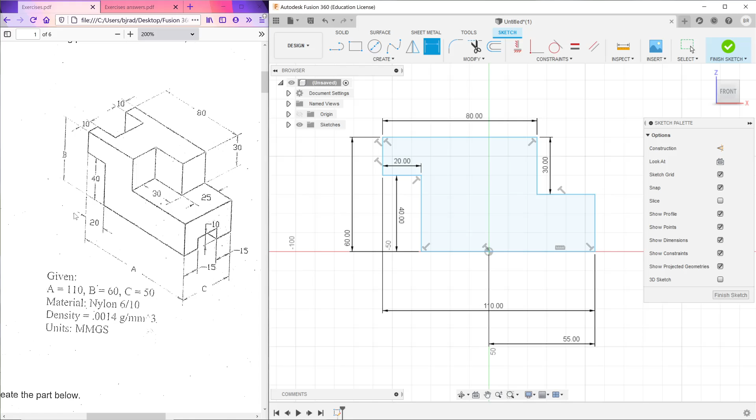Let's see, how far is that inset? We already have that specified, so let's see, what is wiggly here? Aha! The whole position of the thing. Would you look at that? Right, so it's wobbly because I just said that that point there needs to be that distance away from the center point there. There's a better way to do that.

Several ways to fix that. I'll currently just use the coincident one. So that means put this point on this line. So put the center point onto the bottom line. There. Finally, we can see the whole thing is turned black, which means it's fully constrained, and we can extrude it. So, I will go ahead and do so.

So I'll press Q for our press pull. I'll click on this, and how wide do we want it to be? We'll make it C wide, so that's 50. So I'll just do 50, and enter. And there you are, we pushed it over 50. So now we have this shape. Not quite perfect, but it's certainly in the right direction.

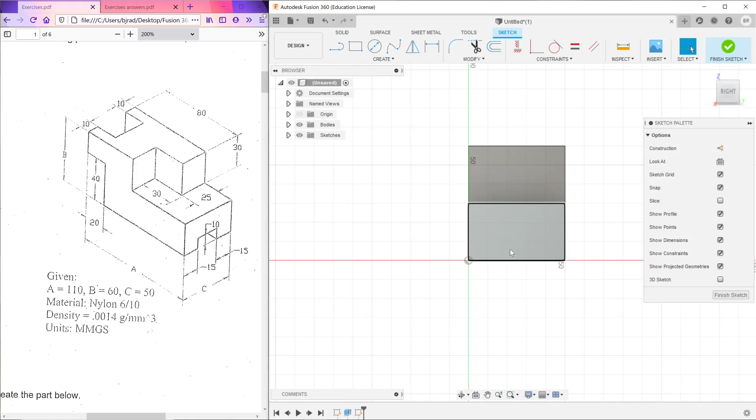First thing I might do is take a look at this cutout down here. So that's on this face, on this side, so I can right-click on that. Go ahead to Create Sketch. Now we're on this face. I'll create a rectangle, so I'll click R to get my rectangle tool, drag up a rectangle, add some dimensions with D, so dimension for the top is 15 wide. Dimensions for this bit it's 10 tall, just like that.

Now you notice this is unconstrained because it can slide forwards and backwards throughout this whole segment here, so we want to put it in the middle. There are a couple ways to do that. What they've told us here is that it's just 15 of space on either side, so we'll follow their instructions and do what they want us to do, which is nice and natural, so we'll click on that, and then on this edge there. Oh, whoops, that was the wrong edge. So, escape a couple times to unselect all that.

Click there, and make that 15. You'll note we don't need to repeat the second one because we've already given the width of this, so it's all turned black, fully constrained, no open points. So it's all fixed there. Cool. Actually, this whole thing seems a bit thicker than it should be, doesn't it? Have I been silly? Yeah, okay.

So I've misread this design here. The design, I originally thought said that this middle section was 15 wide. That's not the case. This 15 is referring to this gap over here. It doesn't actually give us the size of the cutout. So I need to delete this constraint, so I can select it, press the delete key. Now you can see it's variable again.

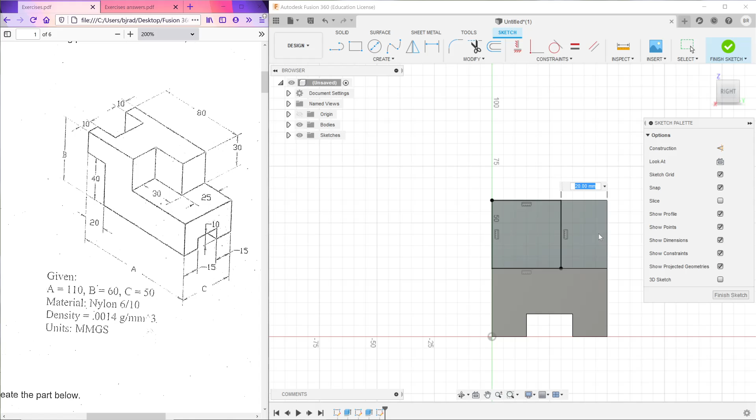So I can click the D for dimension constraint, click on this edge, click on that edge. I would like that to be 25 away. Now it's fully constrained, it's all black. Q for press pull, click on it. We want this to go in 30, so I'll type minus 30, enter, and it goes back in 30. Repeat the same process on the top.

So on the top, we're going to do right click and create sketch. We're going to click R, create a rectangle, just like that. Then we can go ahead with our dimensioning tool and say from there to there, it's supposed to be 10 millimeters, and it's supposed to be the same distance on the other side. So there we are, 10 millimeters. That's what our design has told us.

How far in does that go? Well, here is one of those cases where this design is ambiguous, which is very annoying, but I assumed, and I think it's the correct assumption if I recall correctly, that this is also inset by 20, just like this is. So it's the same amount of being pushed in as that is.

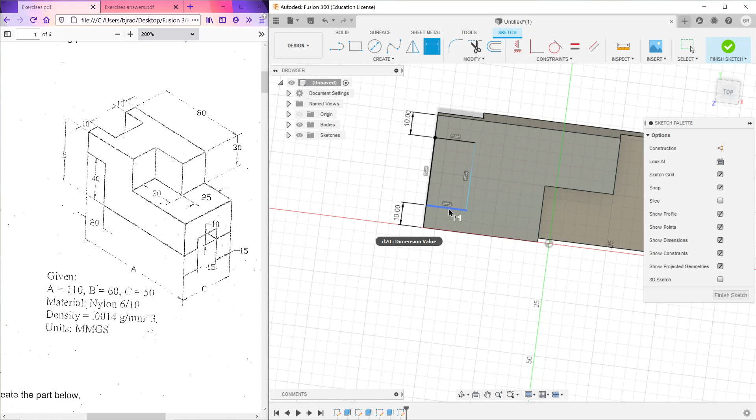So in that case, we can say this size here is 20, or I can show you a cool feature. If you would like to include some line from this three-dimensional object into your sketch, you can project it.

First I'll show you where it is graphically. If you go into Create, Project and Include, then Project is way down there. It has a shortcut, P - I would definitely use that whenever you can. So if you click the P button, you get to this Project menu. Now you select, it just says Geometry, so that can be anything in this three-dimensional setup.

I'll take this line down here, click on it, and now you can see up in our sketch it's been projected in as this purple line. I'll click OK or Enter - both of those will finish. I'll get back to my top view for my sketch.

So if we want that to be in the same distance, then all we need to do is give a constraint. We could do a coincident constraint and say, hey, put this point on this line, and that fixes it. That's all black, all constrained.

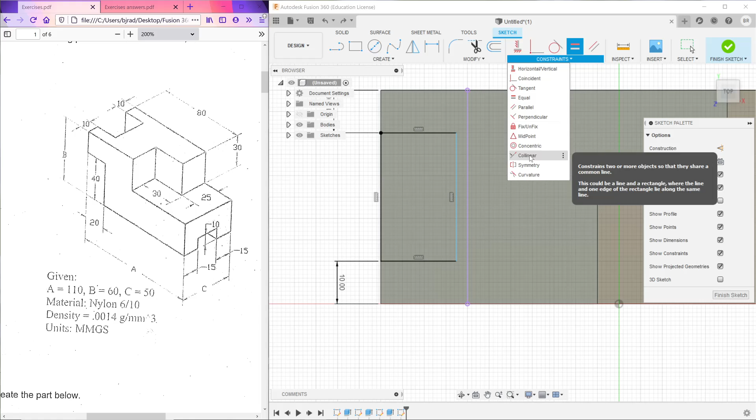An alternative approach would be to look at a new constraint we haven't seen before, which is collinear. This means that they share a same or a common line. So if you want two lines to line up end to end with each other, you can select that line, and that'll bring them together. That's just another way to go about it.

And of course, if you didn't want to do any of that faffing about with projection, you could definitely 100% just do the calculation in your head, or just look at this and say, hey, that's 20, press D, and assign this to 20. All of those are entirely equivalent options, with some slightly different side effects down the line.

I'll do the coincident one - that's nice and short. There we go, stick it that way. All black. That's all we need to do.

Q for press pull, click on that. Let's do extent to object - look at the bottom, go all the way through. Clicked on the object, and we go all the way through.

Okay, there's our cutout. So I believe - I might be being silly and forgetting something, I'm sure I am - but I think that is our complete object there.

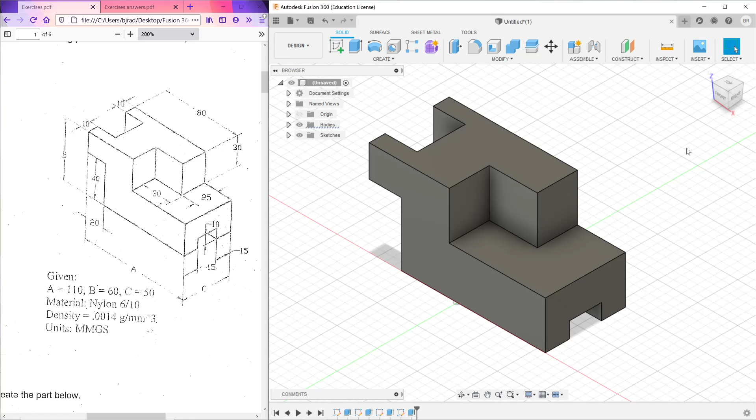Well, we can double check. Press S to bring up our little menu, and get physical material. Assign the aluminium 6061, which is there. Click, and drag it over, close that. Go to the bodies, get the property of the body, and we can see it is 519.75 grams. And over here we see 519.75 grams. So we know that has the same volume, which means probably the correct shape.

Does anyone have questions about that? I'll create a poll to see how people are feeling. In the meantime, please type questions about anything about that shape. Anywhere you got lost, if you were trying to follow along, I can help unlose you, hopefully. So, cool.

And that one's a pretty similar one to the first one. So we saw a couple of new tools there. Repeat the coincident part, please. Yes - so I assume you mean when we were up in this sketch here, where I stuck this line to that projected line. Have you gotten to the point where you've projected this line from down here?

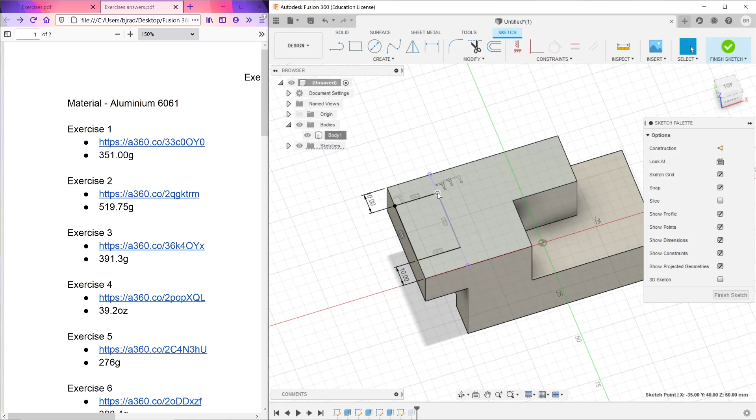So you have the purple line in your sketch. Maybe that's the case - can I select that? Oh, interesting. Oh, there's like 3 different things there. Oh, or is that what this is? Okay, yeah, so I can repeat the coincident part. I'll see if I can undo just past that.

So, there we are. So, for this part, the coincident constraint is this one up here. Also, I've been grabbing my constraints from up there because they're just visible. You can also do the S, though, like I said before, and do coincident.

And if I had the coincident thing, you just pick a point somewhere. So I'll pick either this corner or this corner. And then I can click on a line where I would like it to go - I'd like it to go to this purple line. So if I click on that, it goes ahead and extends it for me and locks it in.

Does that answer your question? Or was your question about some other coincident point?

Neat, finish sketch. Whoops, I undid my press pull. And extent to object. Click bottom, and done.

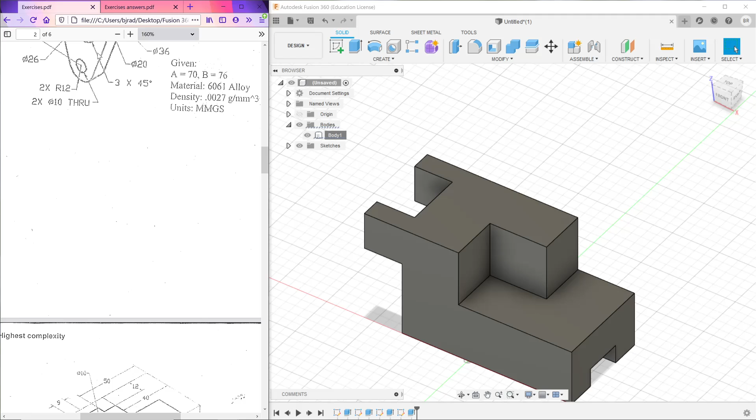Wow, that was not what I intended to do there. I'll zoom out a little bit farther. Take a look at this. This part, looking a bit crazy, right? I think, yeah, we got half an hour left, so I'll go through this one. I'll go through it decently slowly. There's going to be lots of new things along the way.

Feel free to interrupt at any point wherever you have questions, and I will keep an eye on the chats. So, Control N to start a new document. I'll close and get rid of my last one. Destroy it. And we'll start on this.

So looking at this part, it's a bunch of different ways to start it. Knowing where to start things is more intuition than like a right and wrong answer. I'll probably start with on the ground this circle bit. I'll build that on the ground and I'll just build it upwards. I think that'll be fine.

So for me, I'll click Create Sketch, click on the ground plane, and then I'll click C to draw a circle. I'll click on this center point and I'll drag it out. Now, you might be wondering, how do we know how big this circle is? Well, I can first type the answer, which is 76, and hit enter.

And the reason I know that is because you have this little symbol here. This symbol that looks like a circle with a line slashed through it, that gives you the diameter of a certain value. So you can see here, there's a diameter of 76, which actually Fusion uses the same diameter symbol, and it's pointing to this outside ring there, so we know that's how big this ring is. So that is that.

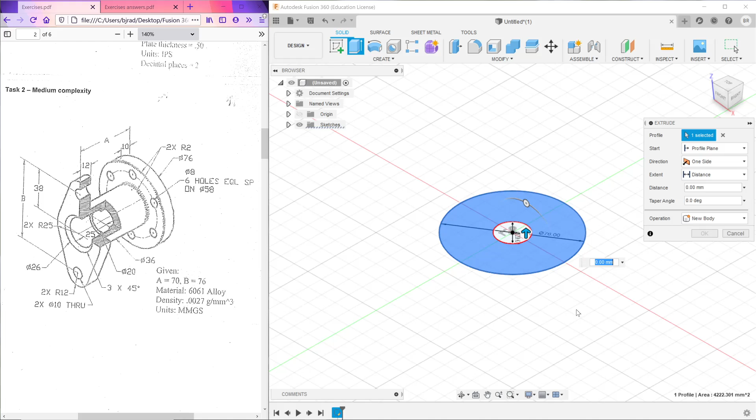Now, I think what I'll do here is I'll call that as a simple first sketch, and I'll extrude this up a little bit. So I'll click Q, click there, type 10. This 10 has come from this measurement here, so we know that that's 10 millimeters thick. So there's our base bottom shape so far.

Now, we're going to encounter something new. We want to place 6 holes evenly spaced around a circle in here. You can see from this design, it says there are 6 holes equally spaced, which is what the EQL-SP means. So equally spaced on a diameter of 58 millimeters. So what we can do there is click on this face.

Ah, yes, we get to see a new thing. That's exciting. Create a sketch. We want to draw a circle again, and we know that that circle is going to be 58 millimeters across.

But we don't actually want a circle here that we're cutting out or extruding or anything. We just want to put other things on top of that circle. So if you want to create parts of a sketch that aren't actually part of the final design, but you can use as a reference, you can turn it into a construction line. Click on the line, and click this construction toggle here. You see that's turned into a dashed line.

So that means it's a construction line. You can see now this is just one face, we're not splitting this face in half anymore. When it wasn't a construction line, there was a separate face out there and the inside - those were separate parts. But once it's construction, those are no longer different. You can also do that by selecting this and pressing the X key, and then you have your dotted line all the same.

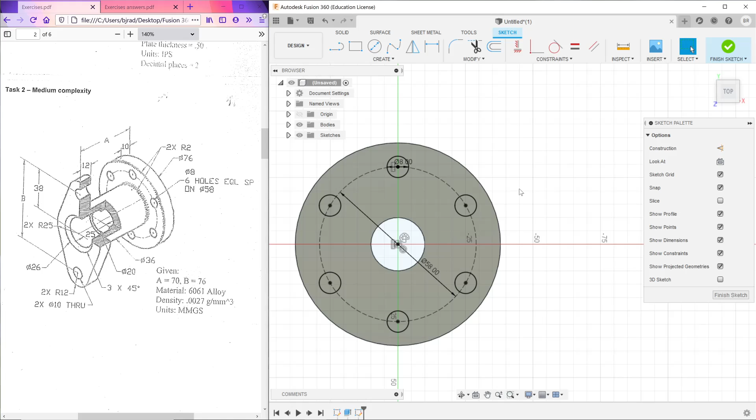There you are, you've got a bunch of holes around. Now, there's a bunch of different ways I could have done this in different orders. At this point, I could do a press pull and grab all of these individually, then push those all back into the bottom to cut them out. But that might not be the most convenient way. So another way that you could do an equivalent thing - I'll cancel and undo. Don't want to go too far, do I? So here we are, back before we've done things.

Instead we could just take this singular sketch here, and with Q, take this circle and do a to-object cut it out all the way to the bottom. Oops, there we are. Okay, so there we are, we have one cutout hole.

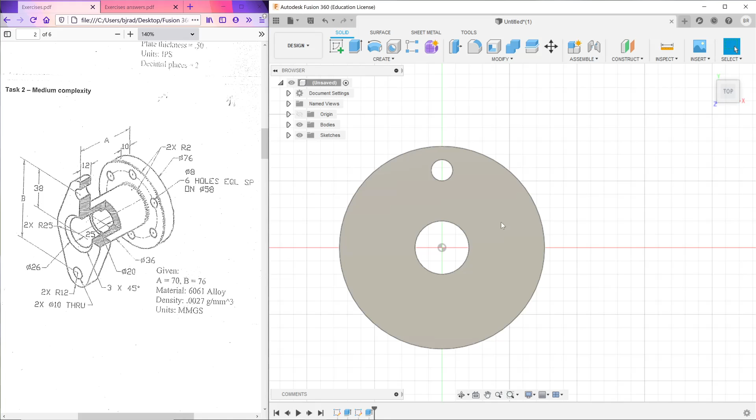Another thing you can do from this workspace is still do your circular pattern. If we go back to the top, or even just a 3-dimensional view, if I search up my circular pattern and go here, I can now select a type of item. So I want to rotate a feature - a feature is something on the timeline. This hole was created by this extrude feature. So if I select feature, I can select this feature here, which is this extrude. You can see it highlights it in blue in Fusion.

Then I can take the axis - this is a bit different from our sketch one, because now it's in a 3-dimensional thing, and I want to rotate around this blue center axis. Then I can say something like 6, and enter. This time it actually rotates the full cutout, not just the circular sketch things. So that's another way to do the exact same thing. Lots and lots of options in Fusion.

Awesome. So that's what we have there so far. This squiggly line here that's pointing to that, and then also to this, means it wants a fillet there, so a rounded edge. We can apply that now, might as well, at least for this outside one. We can apply that by pressing the F key. That brings up our fillet, or of course you have this option up here, that's your fillet, a rounded corner.

So I'll press the F key, I'll press this, and it tells us it is a radius of 2, so I'll go ahead and type in 2 for the radius, hit enter. There you are, nice rounded corner, all the way around the outside. Coolsies. Any questions about what we've done so far? We'll hopefully just be continuing on, there's plenty still left to design, but I don't want to wait too long to ask if people have questions.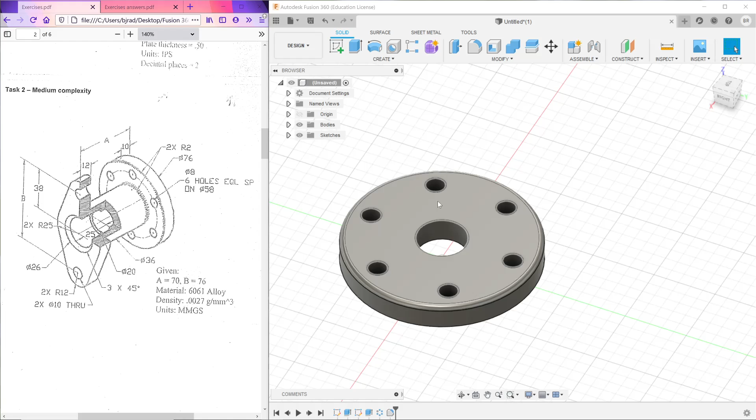Next thing we need to do is this big column here. We're given the diameter of the outside of this column is 36, so we need to make it a 36 around the outside, and we know that there's this hole here through the middle that's 20. We already have that designed in. So here I'll click on this face, right click on it. Oops, I wasn't clicked on Fusion. Right click on it, and then create a sketch. And from here, grab a circle, click on the center point, drag it out, make it 36, hit enter. There we are. Slap the extrude button, which is Q, or the push-pull.

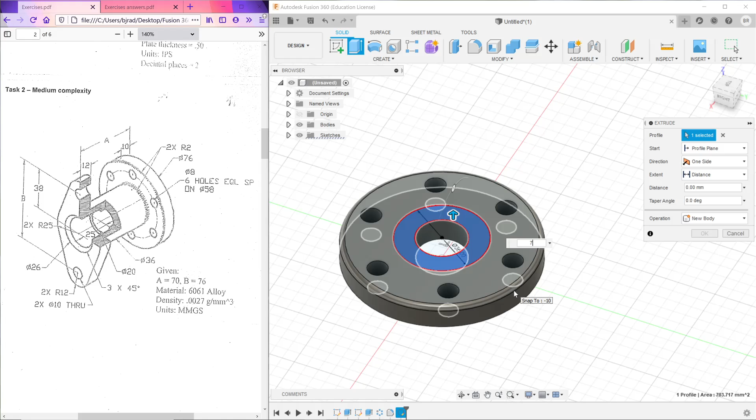Select this donut shape here, and we want to pull that up a certain amount. There's different ways that we can calculate that distance. What it has given to us is this distance A, which is all the way from the bottom to the top. I'll show you something neat, why not? So first of all, we can set it to 70, which is the value of A. That is a bit too long, because that's going to be including this bottom and top bits.

But something we can see here is you can do maths in these little fields. So if I type 70 minus 12, which is going to be the width of this top segment, minus 10, which is the size of this bottom segment, that will give us the correct thing. It'll calculate it. It's 48. So we don't actually even have to do that ourselves if we don't want to. And then go ahead and hit enter, and there you are. You have it going up the correct amount.

From here, now we want to create this really weird face shape, and here's where we're going to see a bunch of wacky new stuff. So I want to create it up here, so I'll right click on this, I'll say create a sketch, and now things will get exciting. Yeah, it doesn't really matter which way I create it, so I'll create it this way. We're given a couple of little points.

Reading these designs is honestly sometimes quite difficult. I'll admit the first time I made this part, it took me ages to figure out what they were telling me, and there are still parts of this that I think are disgustingly unclear. Like this diameter of 26 is not actually, believe it or not, the diameter of that outside circle.

But it's actually the diameter of this inside part, which of course they do a great job of labeling by putting the arrow in the wrong place. But that is not an issue. What we can do is take a look at these numbers here.

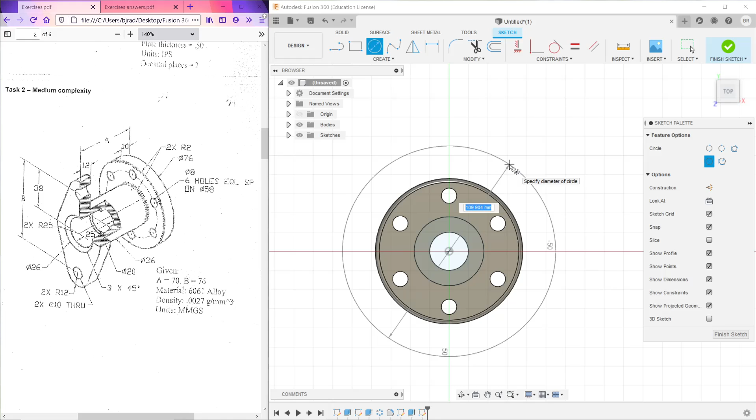There's a bunch of different ways to do this. I've already done this in like 3 different ways when I've been doing this problem. One way that's pretty intuitive, make some circles. So we'll create a first circle here that is a diameter of 50, because it's a radius of 25. So if I create that, you can see there's my diameter of 50. Yep, that's right. Then we can do the same and create some other circles.

And in fact, if you find this confusing to look at, which at this point, honestly, I find somewhat confusing, there's lots of circles there, you can hide the bodies just by turning off the visibility there. Now we get just our sketch. And of course, it's still there. We can just toggle its visibility on and off. So there's a circle. Stick with that. That seems cool enough. And then what we can do is add a couple of other points.

So we know that from this center point out to the middle of that second hole, it is 38 millimeters. So we'll create a couple of holes out here. I should have given the sizes of those. That's fine. We can do that retroactively with D. Click on them. Diameter of these holes is 10, it looks like, for each. And that diameter is given here. It says 2 times 10 diameters all the way through. So that's there for one. There's the other one. Both the diameter of 10.

Oh, actually, hey, we can do something cool here. I can show you a symmetry thing. So if you're doing something that's symmetrical, like we'll be doing here, real quickly we'll say, how far away are you from the center? You are 38 away. And we'll give you a horizontal vertical constraint so that you're no longer allowed to wiggle, so you're on the same horizontal axis. Now you see they're both black.

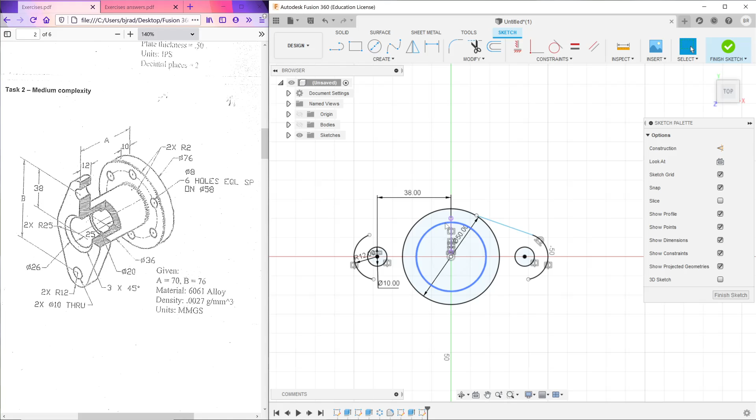In fact, we'd actually like to have that exact same tangent constraint here. And by the way, what I just did, first time I've done it in my life, because I discovered it earlier today while teaching you. Right-click, you can repeat options up here at the top. And you don't have to click on it, you just have to be in the right part of the pie. So you can just right-click and then go up real fast, and you can repeat whatever the last thing you did was. So I want this line to be tangent to this circle here. So you can see that that's done.

Now it looks almost constrained. The line itself is blue, but this point, recall, is still not there. So when it goes across the circle, it's perfectly tangent to it, but it's not actually on the circle. So then finally, coincident constraint, our old friend. I'll do it with S. So coincident constraint, and press that there. Oops, it was already selected. Press that there, it's selected, and then press the circle, and it's connected up. Excellent, just like that.

We could do mirrors, or we could just repeat the same process. I'll probably just repeat the process on this side, and then mirror it onto the other side, although we could mirror it in all directions, it just depends on what you're feeling. Here I'll repeat the process so you can see it. So I'll take my line, I'll click there, I'll scroll along here. How do you smooth the line in the arc component again? Yes, that is a tangent constraint. So I'll go along and make it not smooth. So there's a pretty unsmooth line.

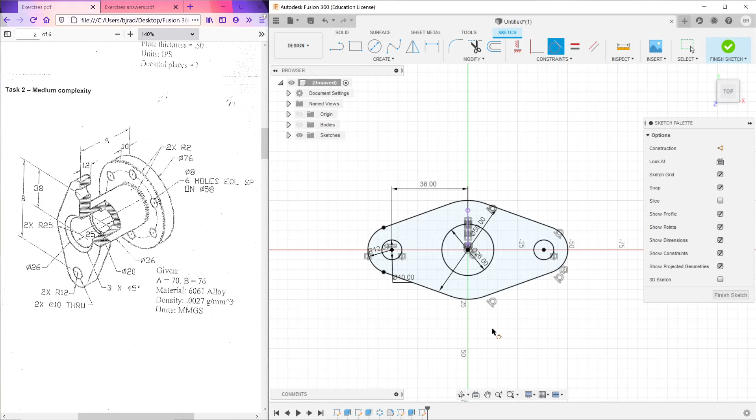I'll pause here real quickly. Any questions about this sketch we did there? That was a pretty funky one. The way that I've done it just now is a way I've never done it before. I've done it 3 different ways, and I've done it 3 times. Any questions about that one in particular? I'll ask in a poll in a second once we've done a little bit more, but I'll just give a pause if anyone has anything to say. Cool, okay. Well, if you're typing, feel free to continue doing so.

In the meantime, I will take this and we'll extrude it. So I'll press Q for push-pull, and I'll press on this top face. We'll look at the side, so we want to bring this up a little bit. We want to bring it up 12, because that's how thick this top is. So we'll type 12, and enter. There we are. There's our top bit. So we're getting very, very close now.

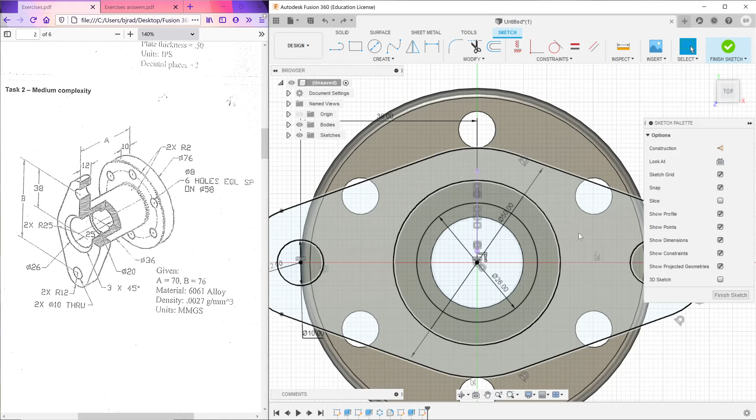Ooh, interesting. Very interesting indeed. Yeah, okay. That's a bit non-ideal the way I've designed this, but that's fine. You can see here that there's this bit of a lip inside, where you're moving from the 26 down to the 20. Ooh, actually no. Okay, hold on. So when we extruded that? No, that's separate. So somehow this line got included here and we didn't want it to be. So that's why that looked more off than I was expecting.

So this line here is our 26 that we drew. This line here is that outside bit. If we want, we can click on that and turn it into a construction line with X. So now it won't be a face anymore. We can also, of course, just select several faces. So if I go back, now nothing has changed here. Well, okay, I say nothing has changed, but I've obviously changed it.

Yeah, it's still a construction line, so turn off the construction line. So here's what we had a second ago. I clicked on this, I push-pulled this whole thing, so you can see it's including that segment. If we want to include this donut bit as well, just click that as well, and you can extrude them together.

I'll probably just do that, actually, to be honest. Then we have that. Wonderful. Okay, that looks a bit more like the correct amount of indentation there. However, we know that that's probably not the right amount of indentation. So yeah, the first way I designed this I think was a bit better than what I'm up to at the moment, but that's right. We can still figure it out.

So it says that's 25 away from the top. We know that this thing here is 12 thick. We can figure that out if we bring up our inspect tool with I. So press I, click on this line, it says it's 12 millimeters thick. So that needs to be 25 down. So what we can do is grab our push pull, click on that face, and we want to move that down a little bit. So I want to move that down the difference between 25 and 12, so down 13.

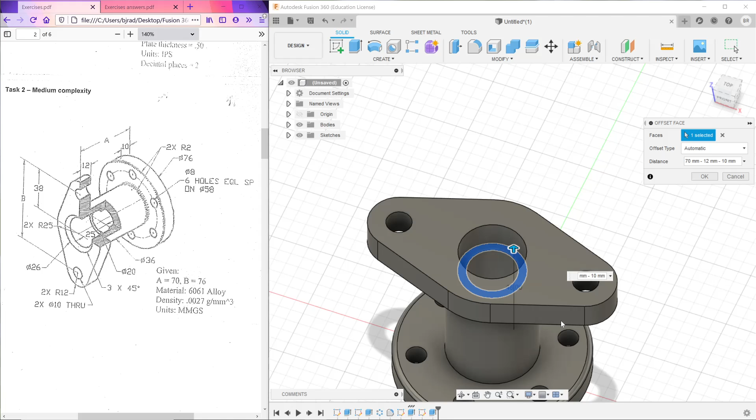So minus 13. Oh, but not the whole thing there. That's a bit upsetting, isn't it? Okay, is it going to let me... of course, because that's just one face, right? If we extrude, maybe, is what we want to do. So extrude with E, grab that, then push that down by 13. Yeah, there we are. So that cuts in.

So there I use the... That's another difference, I guess, Maria, between the extrude and the faces thing. The face, it moves the whole original face. The extrude just grabs this bit that's visible. There are these subtle differences that I guess you just have to come across as you get to them. Awesome. Cool, so that's pushed in the correct amount. We're basically almost entirely done.

Couple of missing features. One is this thing here, which is a chamfer. So it's like a fillet, except it's a straight cut instead of a rounded edge. So what we can do is bring up the chamfer tool, which is either here under chamfer.

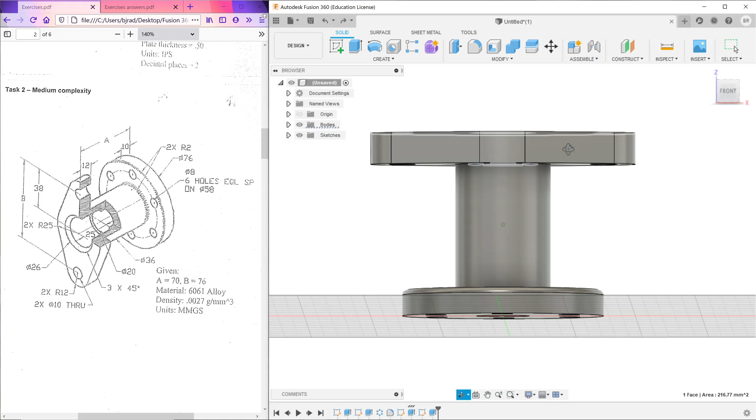Last step again, yes. So the bit where I push this in. Yeah, so for you, Isaac, this step here is kind of, if I'm being honest with you, a consequence of me designing this part in the wrong order, essentially. Not the best of ways to do it. It'd be better if I just created a sketch on this face and pushed it down 25. But what you can do is select this little donut here that already exists. However, it's at that level, which means it's 12 down from the top. We want it to be 25 down.

So we can press E for extrude, or we can click on this option up here on the top left, extrude, and then push that down an extra 13, and then hit enter. Does that clear things up? Hopefully. Cool. If you are still stuck there, just let me know.

Awesome. But after we push down that segment, it cuts the whole thing for you. Oh, well, that's very interesting. Oh, do you mean like it's made the whole top shorter? So it's done something like, if I were to press Q and do the same thing. Oops, sorry. So not that. If I were to press Q and slide the donut with Q. You mean it's done something like, okay, yeah.

So that's probably meaning that you're using press pull, which turns into an offset face operation. That's slightly different. Be sure, I guess, that you're doing an extrude, which is not actually Q, but you have to press E. It's a separate operation. That's honestly because I kind of did things in a bit of a poor order there. Does pressing E work better for you?

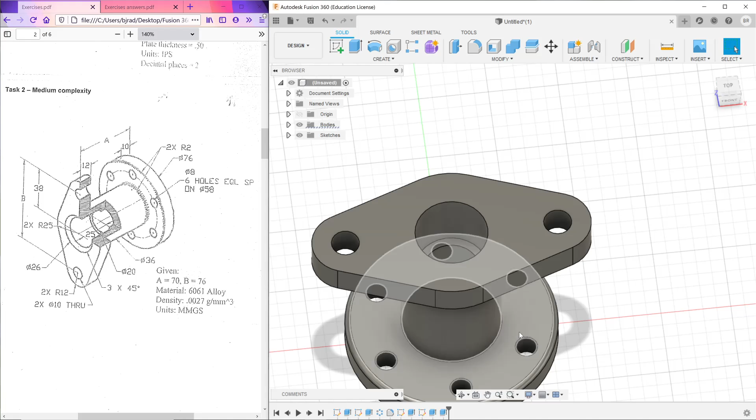I think I'll show, just for the people who have to head off on time, real quick how we finish up this shape, and then I will help you more after that, because that sounds like a bit of an interesting situation. If you'd like, in the meantime, it'd be helpful if you could send a screenshot of your design, or the bit that's giving you trouble, on the Discord, so I can take a look at that in a minute. Okay, cool.

Real quick, for the people who have to scurry off, and I do have a feedback form to send people before they run away. But we'll add a chamfer to this edge. So you can either do that with modify chamfer, or of course our S menu, chamfer.

And here in our design it says that's 3 millimeters, at 45 degrees, so it's by default at 45 degrees. So you can just type your 3 millimeters, enter, and there you are, nice cutout around.

And then also we've forgotten this fillet down here, around this edge. So for a fillet, press F, press the edge, and type 2, because it wants to be a radius of 2. R2 is given there.

And there, I believe, should be our finished part. We'll quickly check, because it's entirely possible I made a mistake in that process with our physical material. So take our aluminium.

Go down here, drag it over, and take a look at the mass of the body. I need to close this menu first. Right click on that, properties. Mass is 276.9, and over here we have something very different.

Alright, so that means that somewhere along the line I have designed something a bit differently, so I'll have to investigate. Oh sorry, whoops, no, it's entirely fine, 276, that's the one there. We skipped 2 exercises, that's me being silly.

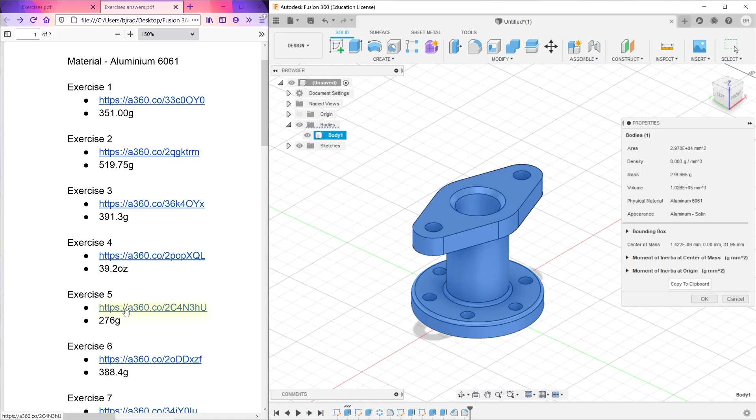We're actually looking at this one here, 276. It's done correctly, if I click on this you can see there to the side. Sorry, my bad, got a bit confused, so we jumped a couple.

Yeah, we were designing this part, so I've got the same mass there. If I click on properties, body, same mass, 276.965, 276.965. All right, cool, so we have done that one correctly, even if we did it in a bit of a weird order.

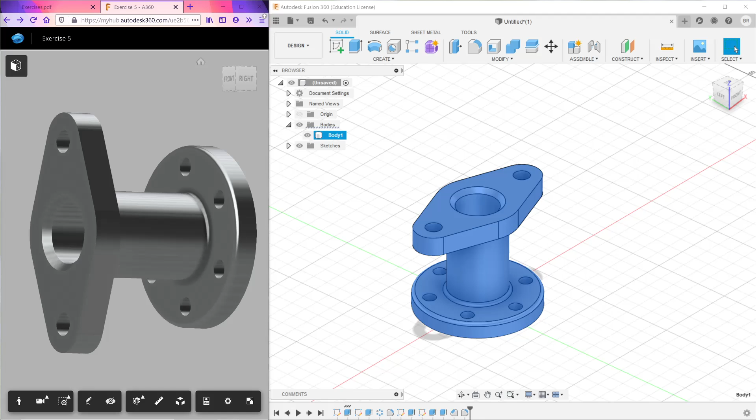Hello? Hello, I can hear you now, Isaac. Got it. Wonderful, I'm just going to look at the screen cap. Okay cool, I'll toss on headphones so you don't have any echo. Right. Cool, yeah, yeah, the screen share is like a presenting thing, I think you should be able to. I'll stop presenting in case that runs into issues for you. And also pause our recording. OBS.